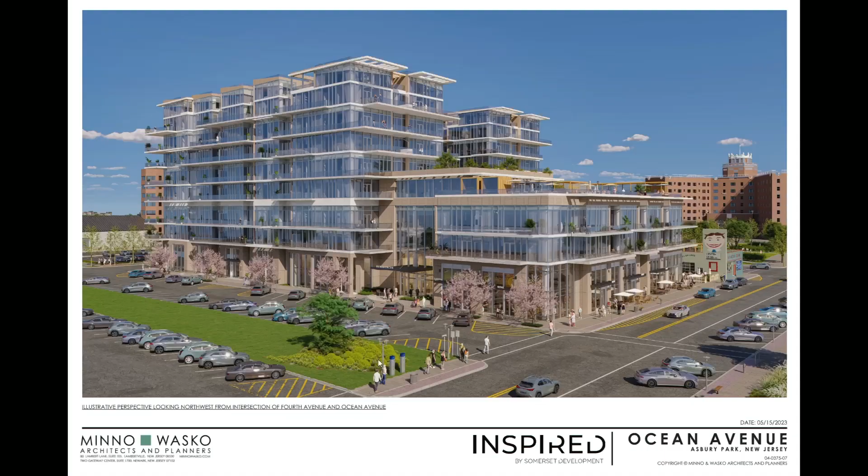You'll see all around the building, if you could show that, Michael, we have stoops on 3 of the 4 sides. The front, along Ocean Avenue, is retail, but on the residential side, rather than wall off the street and hide an interior building, we've actually engaged the street with residences, apartments that face the streets on 3 sides of the building. Very important.

So you'll walk by, and rather than seeing a blank wall, you will see people sitting. I mean, I can't promise the people, but I can promise the front porch. You'll see people sitting out there and being engaged.

As always, every good design, great design, requires some accommodations. We think what we're here tonight for is very minimal. We'll leave that up for you to judge. But great design doesn't always follow a pattern. There are things that evolve over years. Asbury Park has changed over years, and we've done our very best to bring you something that we feel you can embrace and will be a great boon to the community. So thank you very much for having us, and we're here to answer any questions.

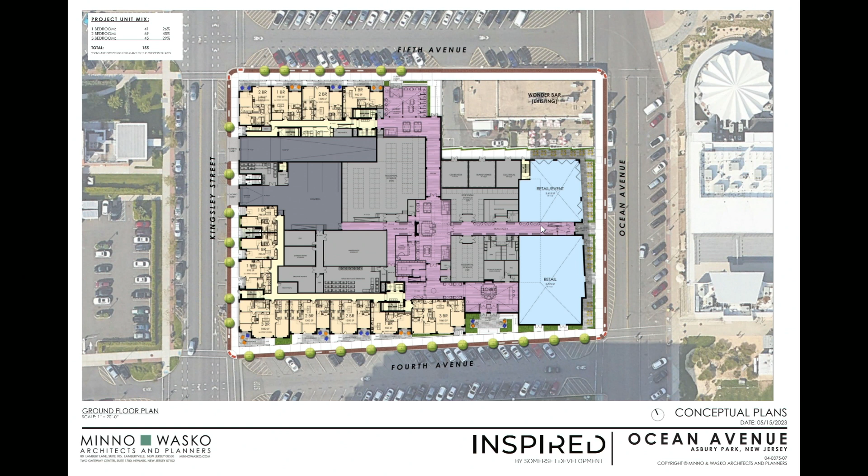At that center connection of the purple corridors is a lounge area, and there's also a bike storage area right behind the retail space. Your planner asked for the number of bikes we could store there—we can store 55 bikes in that location.

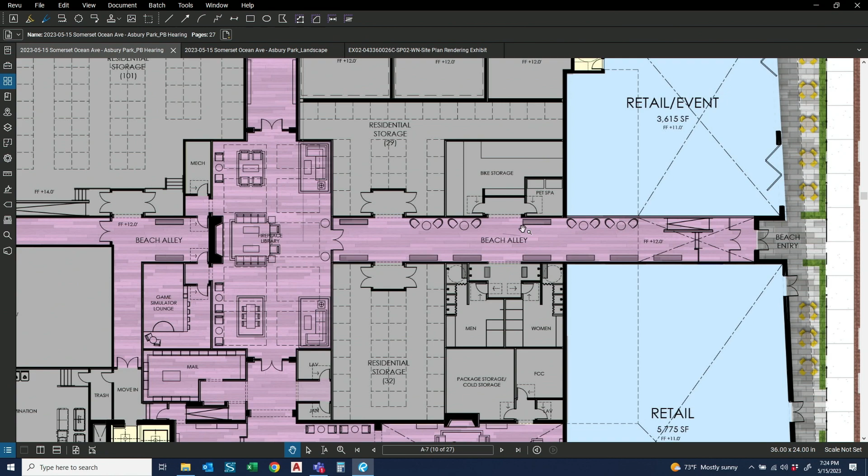We also have individual storage bins if people had a second bike or wanted to store one there. Behind that main lounge area, we have a gaming area, a sports game facility—it could be a golf simulator, we're not quite sure yet.

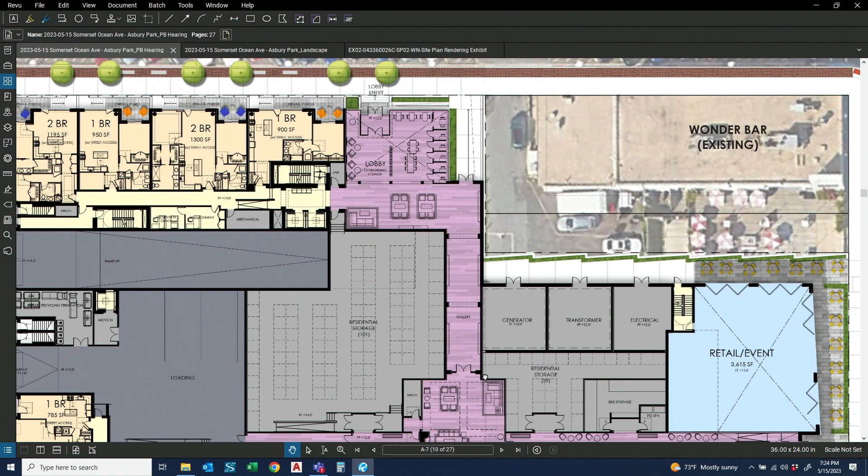I mentioned the mail area. As you proceed to the north corridor, we come to our 5th Avenue lobby. This is a secondary lobby to make it convenient for people who live in the north tower to enter the building as pedestrians from 5th Avenue. This also has an extensive lounge.

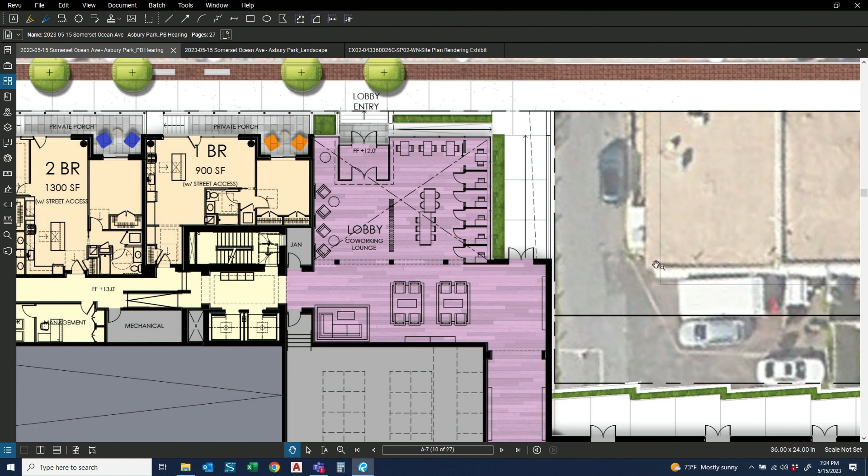We have some actual co-working areas in there for residents of the building. Sometimes we find people who are post-COVID working at home several days a week, like an area outside of their unit where they can do Zoom meetings and have private phone conversations and generally work out of the residential environment. This connects right up into our residential corridor and elevator bays leading to the north tower.

Moving to the Kingsley side of the building, you can see we have units fronting right on Kingsley. We have not only units on the ground floor, but entryways to stairways for some 2-story units that sit on the 2nd and 3rd levels. We'll show you that in cross-section so you can understand it better.

We have 2 vehicular entries. The one on the southern side of Kingsley is our main service entry, intended for move-ins. People can have their furniture delivered inside the building, and we have a service elevator that takes that directly up to the corridors. There's also room in that area to turn a small truck around.

We also have two main trash collection areas on the ground floor. On each floor, each tower has a trash chute which takes the trash down to a compactor located in these two trash rooms. That trash can be brought into the receiving area and picked up by our private trash hauler.

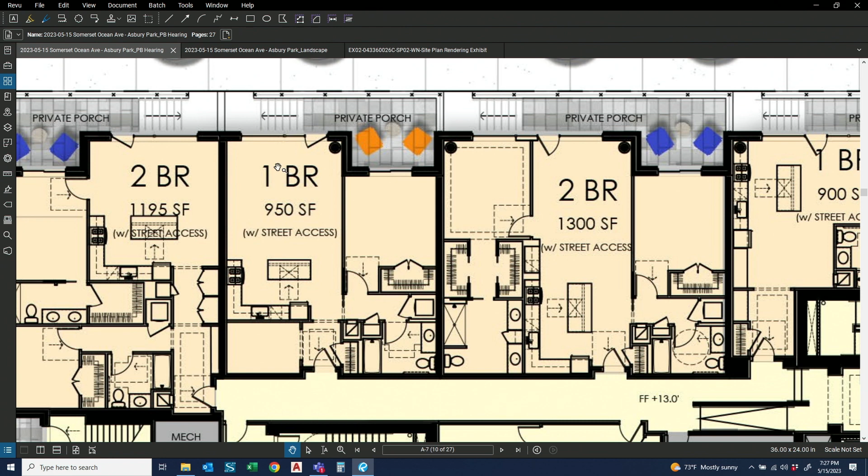They can also reach their unit from the internal corridor that gets them to their car, which is parked on one of the parking levels. So they have two means of access, either through the corridor or through their front door.

Okay, I think we can move on to the next one. First floor level. Yes, this is the A8.

So what we're showing here is the first level of the two-story units that I mentioned. If you look around the edges of the white units shown before, those are 2 stories in height because we have that high first floor. But on the second level, our first residential level here, that also is a 2-story level. I'll make that clearer when we get to the cross sections.

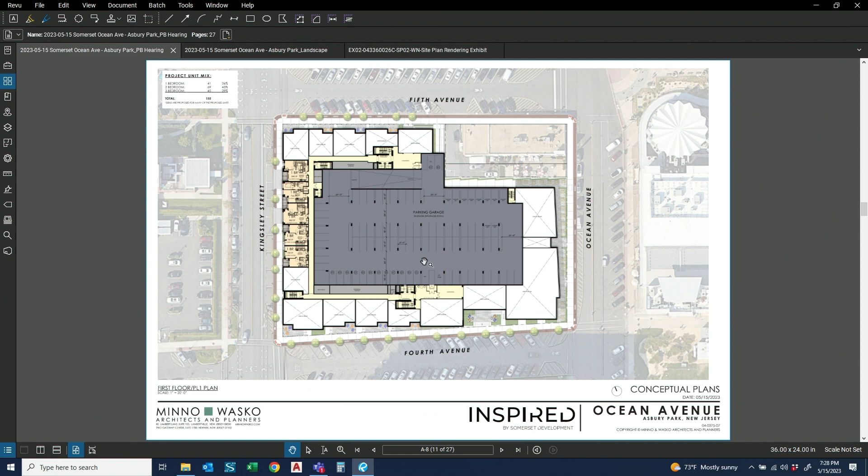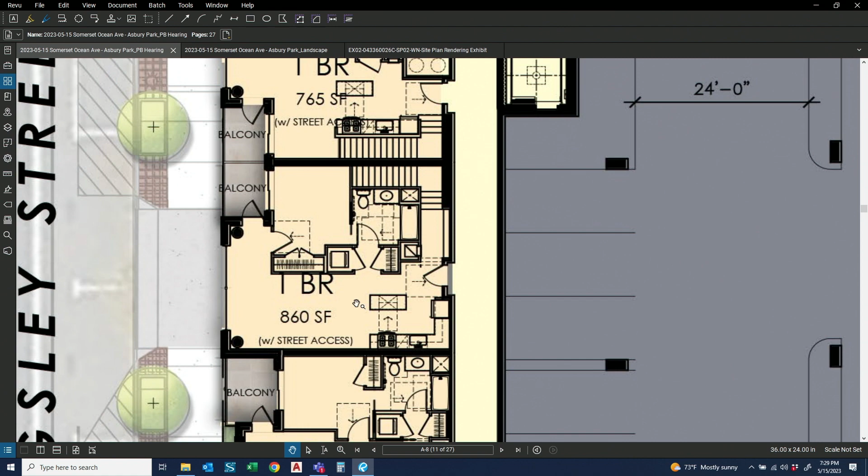Would you mind zooming in a little so we can see it better? So there is a stairway which comes up from a front door at the street level, bringing people up to enter their unit from the street. They also have corridor access to that. And the spaces you just looked at are 2 stories tall. So that's a unit with a double height ceiling, not a mezzanine. They too have balconies that face Kingsley Street.

What you see there is our first level of parking. We have 3 levels of parking, generally with 90 spaces per level. The ramp is located on the northern side, so people progressively ramp up to the upper levels.

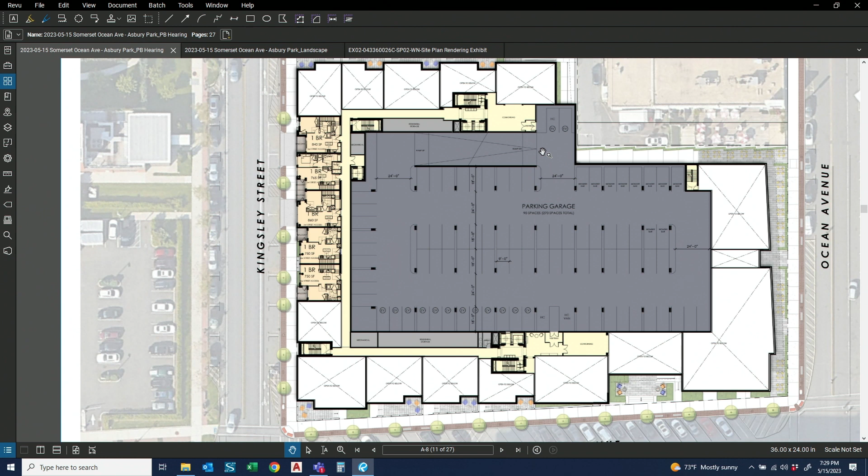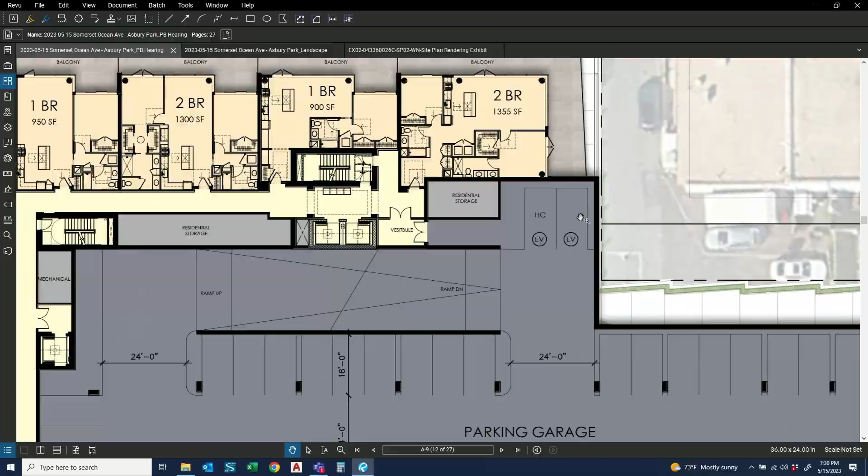While we're on the plans, maybe I'll address this. Your planner shared some concerns about 2 parking spaces on each level which back out onto the ramp area, and he had a safety concern there. We're actually over-parked, and we're going to agree to relook at that area and remove those spaces to eliminate any parking hazards. Originally I told you we had 270 spaces in the building. If we eliminate 2 per each of those 3 levels, we'll be down to 264 spaces, which is still conforming to our parking requirements.

So moving along, the next level, called the second level plan, you see the white areas along Kingsley - that's the 2-story height. This is A9. Those are the 2-story areas of the units located along Kingsley, and again you see regular units starting to wrap the plan. What you see here is units that are also along Ocean Avenue. They sit over the retail space and below our amenity deck.

This is the 3rd floor plan, A10, showing the third parking level. Now on the Kingsley side we continue with units that wrap continuously around. All the units on this floor are single level units.

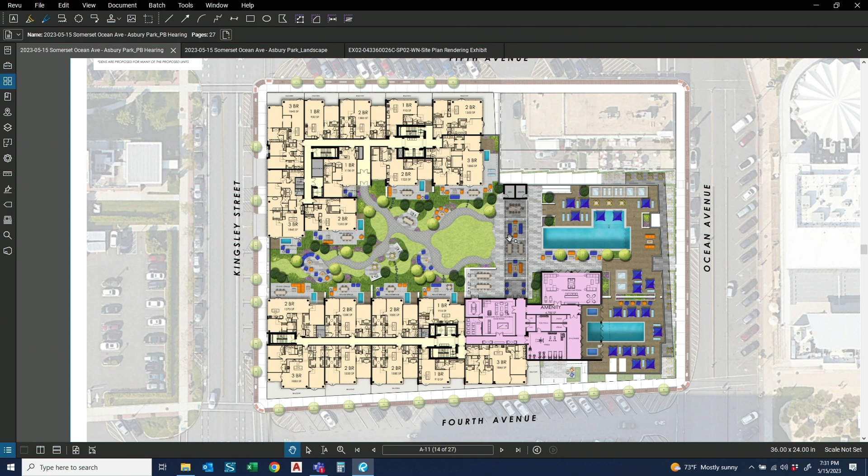So now we're at the fourth level plan - this is an exciting floor plan, right here. A11. What you start to see here is the definition of our two towers, one on the north and one on the south. So the building, where we have 8 stories and a mezzanine, now breaks into those 2 tower levels. And you start to begin to see the tremendous amenity package we have, both outdoor and indoors.

I'd like to take a little time here and talk about the indoor amenities. We have a common living room area - can you point to this? We have an area there that really becomes a space people can reserve for a party. If you want to have 15, 20 friends and your unit isn't large enough to accommodate that for a birthday party, you can reserve that. It's not rented out to the general public, it's for the units.

And that has beautiful doors that open onto our pool deck, so this could become an indoor-outdoor space. One of our charges here by our client was to make this a 4-season resort-type feel, and I'll show you some of the ways we've done that.

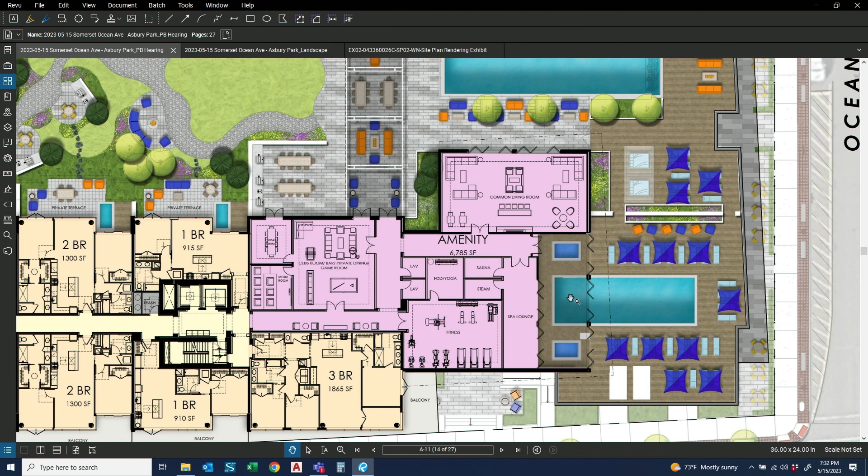We have a spa area in the front of our amenity package, which has not only a typical gym, stretching and yoga area, but we have sauna space and an indoor-outdoor pool. There are 2 sets of glass doors that open up and provide views toward the ocean. You can actually get in the pool in the off-season months, year-round - get in that pool and go outside and it'll be heated year-round. So you can utilize that spa pool throughout the year, and that we think is one of the great features about this project.

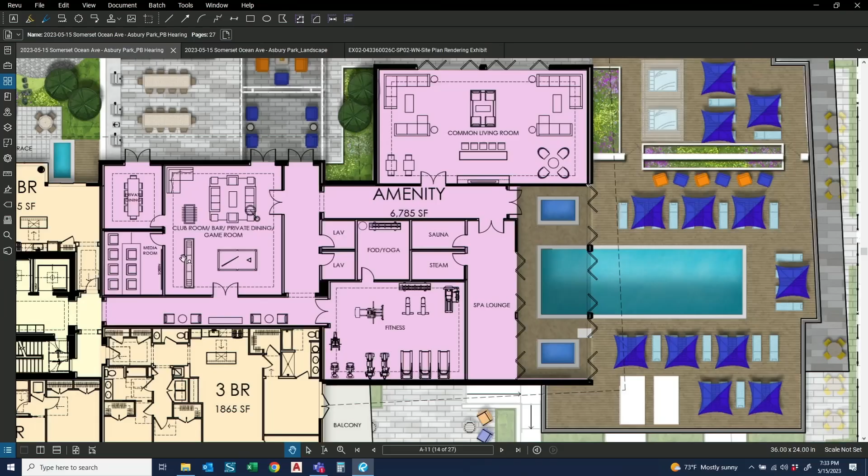Going a little further back, we have another club room and a private dining area, with views to the indoor and outdoor dining area, which has outdoor tables next to a common cooking area, a grill area.

People are not permitted to have gas grills on their balconies, so we've provided an area where people can reserve a grill and have a barbecue.

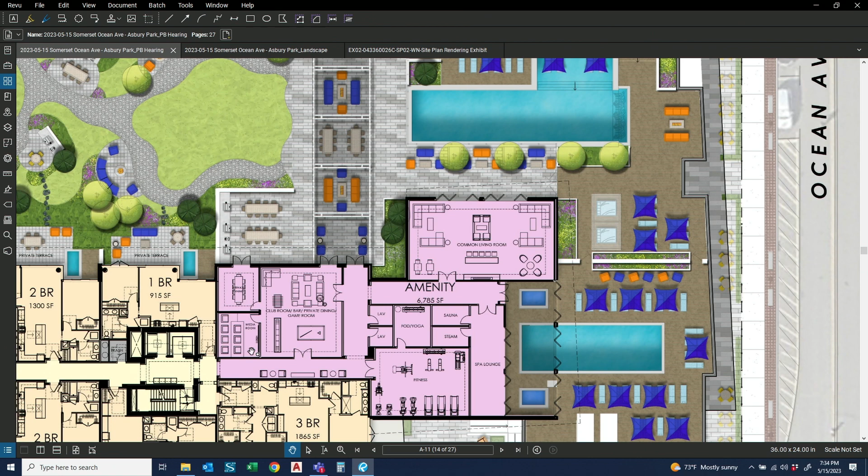We also have an indoor media room, an area where you can get a group of people together and watch the latest movie. We think that's going to be pretty popular too.

Our main elevator core on the south tower is located right in the center of the plan. Those 2 elevators give access all the way up to the 8th floor, and we have our 2 exit stairs required off of that floor area.

Moving to the north tower, we have our 2 elevators there with our 2 stair towers.

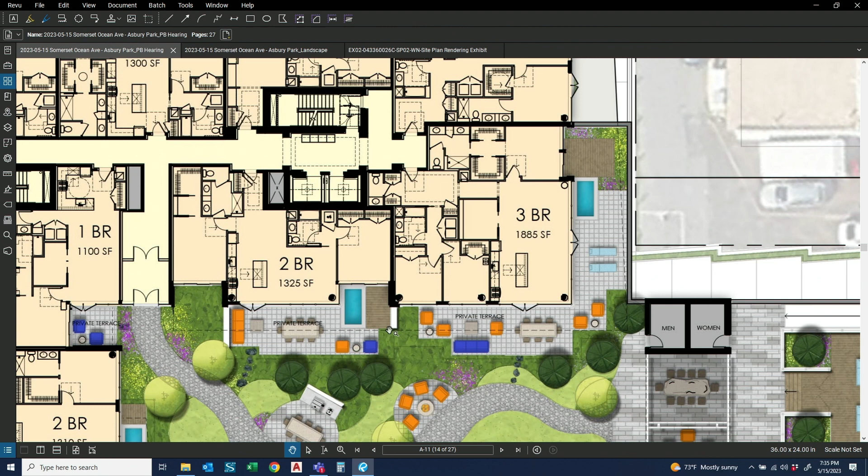One of the things about the units that face this tremendous grand terrace, the green area on the western side of our site, is that each one of those units has their own private terrace. On those terraces, which are on the roof of the garage, we've put little plunge pools - very shallow pools you can sit in, have a cocktail, and enjoy conversation. We think that's going to be a real popular item.

So those look out on this beautiful landscaped area. Our landscape architect's going to talk more about this, but we have a more informal pathway in that area with seating areas located there.

Same thing on the south tower for the units that face the internal courtyard - each of those 4 units has a private terrace facing that area. The outside units, on the street frontage, all have balconies along that edge. You'll see that in further perspective rendering and on the north side as well.

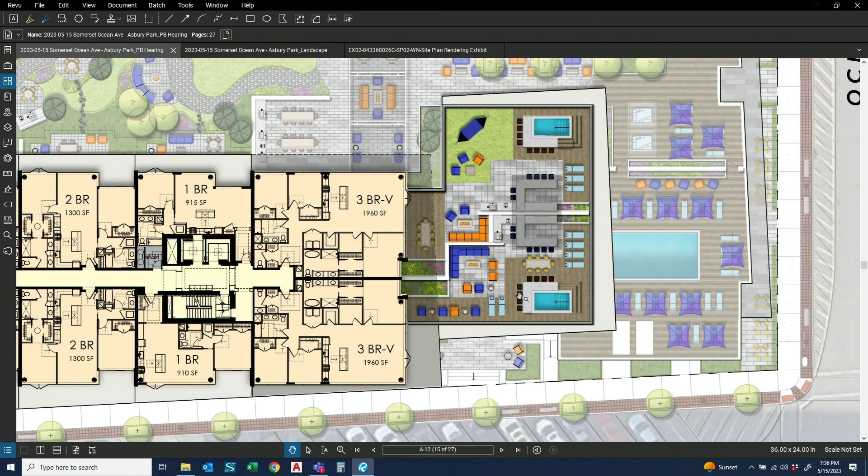Next slide - this is typical floors 6 and 7. This shows the 6th and 7th floor, which are exactly the same, with the towers coming up with 1-story units on each level. Let's move to the next one.

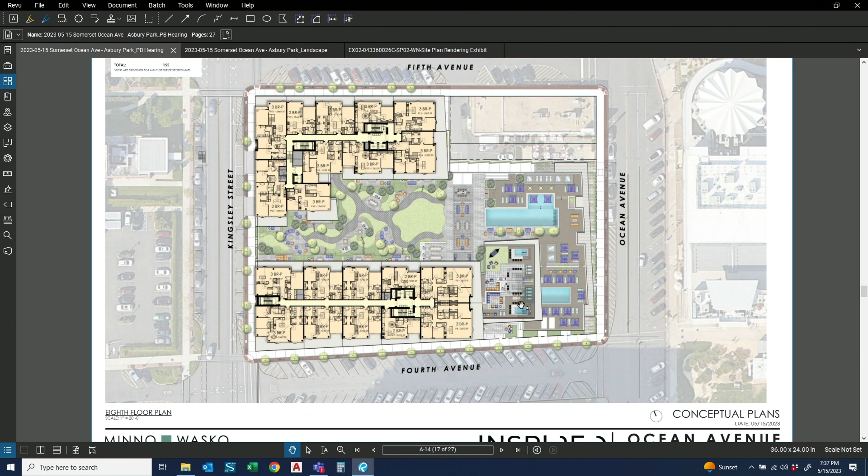The 8th floor plan is unique in that these are the units that have mezzanines in them, meaning they have a small floor area internal to that unit reached by an internal stairway. We vetted with your planner the allowable areas of those mezzanines.

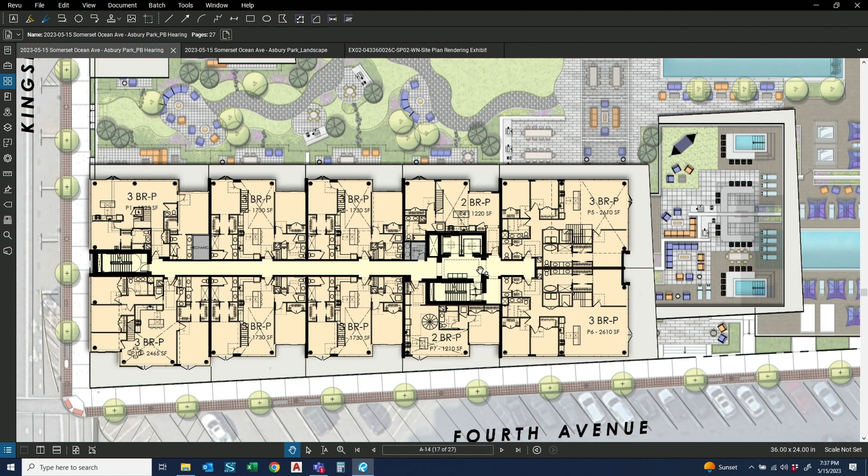We have a couple of different stairway configurations leading from the living space - a circular stair in some of the other units. Not only is there a mezzanine, but we have double height space in the living areas to give those an attractive pop. Dave, could you confirm the redevelopment plan allows the mezzanine on the 8th story, and that's where they're located? That's correct.

If you go to the next plan, A16, this is the mezzanine level. It's a little complicated to understand, but the lighter tan area labeled mezzanine is the actual floor area - a small den or overlook library that overlooks the living space below. The internal stairway comes up, and we generally have a powder room and a little mezzanine loft area.

From that area, you can come out to the roof that sits over that 8th level, and we have small patios located there. What these mezzanines also do is screen our rooftop mechanical equipment, which is on the 8th level roof - not on the roof of these mezzanines, but on this level in the center of the plan.

So we have our condensing units located in the center. The walls in those mezzanine spaces are generally blank to that center area, so you're not looking at a bunch of mechanical equipment. We feel like it's a rather good way to hide those. It's also in the center of the building, so none of it's visible from a pedestrian, a driver, or somebody on the beach. That mechanical equipment will all be screened in that location.

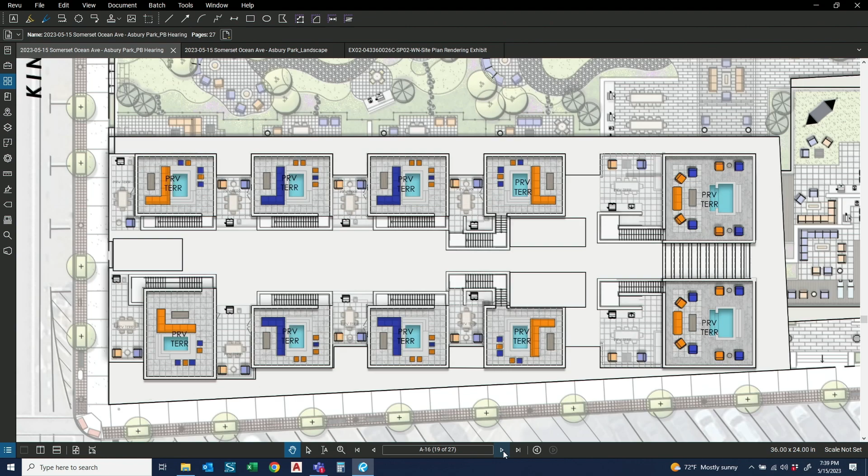Dave, can you confirm that it's compliant with the number of stories and the maximum height that was agreed to with the city at 130 feet? It is, yeah, and we can show that again in the cross-section of the building. But yes, our building is compliant.

We had a few TRC meetings with some of you present where we talked about the building height, and there was an agreement that we are an 8-story building with a mezzanine. I think there were subsequent agreements that our height would be capped at 130 feet from the average grade level to the rooftop surface. So we meet that requirement.

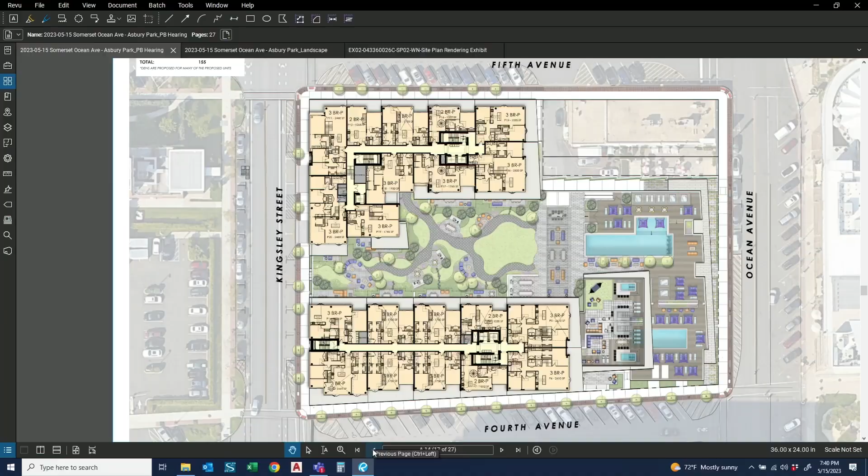Why don't you expand the plan a little bit on that 8th level to show the same thing occurs. Go back on the north, yeah, there. So we have those mezzanines on both sides of the building, both the north wing and the south wing. It also screens the mechanical equipment on the north side. Moving to the very top level, we have another rooftop deck just for those mezzanine units, with seating areas available up on those very, very top levels.

This is Exhibit 17, showing the top roof level of the building. You see that we have no mechanical equipment located there. The colored items on those roof decks are actual furniture that are located up there. We are showing the ability to have a plunge pool there, which is a very low embedded pool in that deck area.

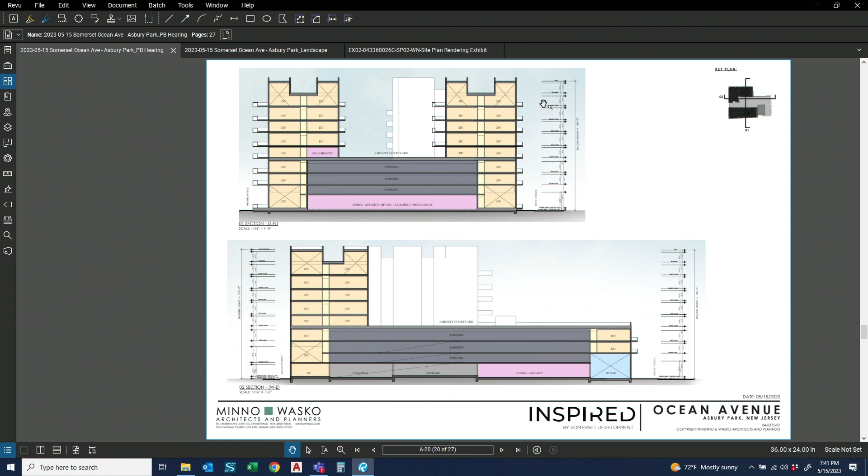Why don't we move on to the next slide? We can come back to any of these if you have questions. This is the slide which shows, if you look at the upper cross-section, this is Exhibit A-20, that we have 8 levels. If you look on the street sides of the building, either the right or the left, we have one double height level at base floor, then two levels up to the deck level, then five levels moving up, and the mezzanine is the very top. So we have 8 levels plus a mezzanine.

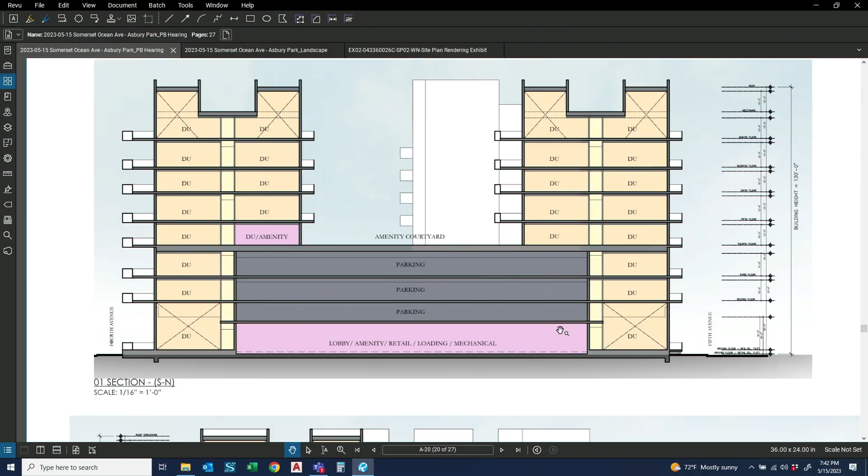The parking levels that you're seeing here are embedded in the building. Nobody sees those; they're surrounded entirely by architecture on the outside of the building. But because we're slicing through the building with a knife to create this view, you see the 3 levels of parking with our amenity courtyard on top, and the purple level on the bottom is our lobby area where the beach access is, where all those storage units are, where our mechanical space is, and then we have a bit of amenity space shown on the 4th level.

This is a cross-section cut the other direction. Kingsley Street would be on the left-hand side of this view, and Ocean Avenue on the right. On Ocean Avenue, we have our 2-story high retail with 2 levels of units before we get to the amenity deck. You see the embedded 3 levels of parking behind that, and below that our lobby area and mechanical space. It's totally surrounded.

On the Kingsley side, we're totally surrounded by architecture, so you can't see those parking levels. Here it's a little bit different configuration — I mentioned those two double height units on Kingsley. There's a single height unit on the ground floor, a double height unit in the middle, and at the 3rd level a single height unit. Then again we have 5 levels of residential with the mezzanine on top. So this too is 8 stories with the mezzanine from the Kingsley side, and you see that continues around the building.

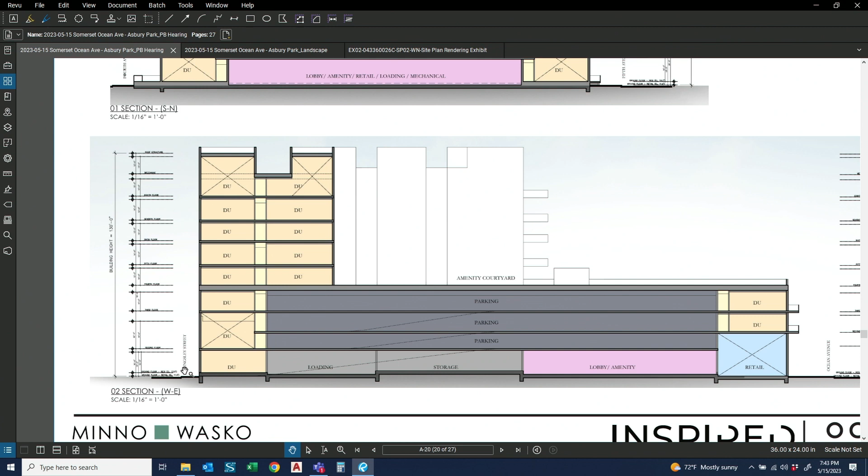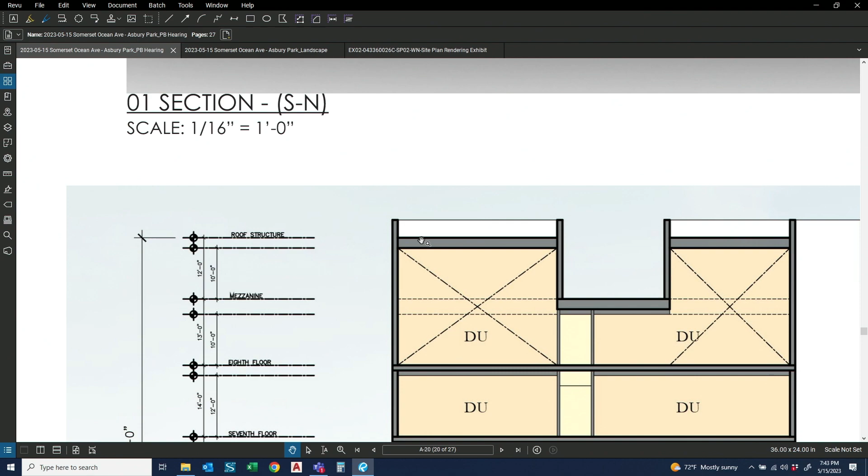All designed to comply with the 8-story limit and the 130-foot maximum height. The dimension is actually on there, hard to see, but we take it to the roof deck level. I think there was a question from your planner about the height of our parapet — typically we're about 42 inches for that. We're not totally designed in construction drawings yet, but that's excluded from the height requirement.

Next slide. So I want to talk a little bit about our building materials.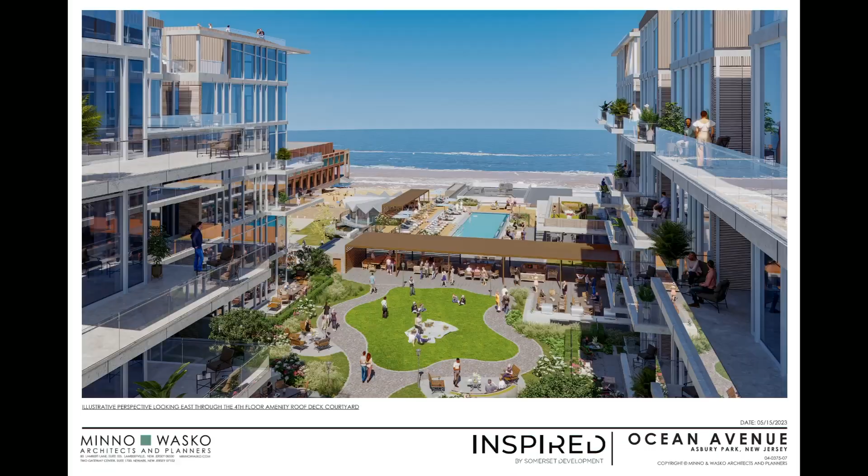Our next view is looking obviously east toward the ocean, between the 2 towers of the building. One of the things we want to show here, it's not an exact view of exactly what people to the west of us would see, but we've tried to preserve the view corridor from the Asbury Hotel directly through. Some of you might remember we showed a diagram at the TRC meeting where we showed the actual windows in the Asbury Hotel and how they focus through this view corridor to the ocean. This is Exhibit 822.

So in the foreground, you see our grand green terrace in the frontage, and then you see our main pool area in the back. The spa would be to the right of this picture over in that area. You see some of the shade structures, and I'm going to let our landscape architect talk a little bit about that. But what you see here is how the building opens up on the north side tower to make sure that this view is expansive through there. It's not all the way through a narrow view from Kingsley through—it opens toward the ocean side.

This is a view, what exhibit are we on? We're up to 823. 823 is a view looking from the northeast into our amenity deck.

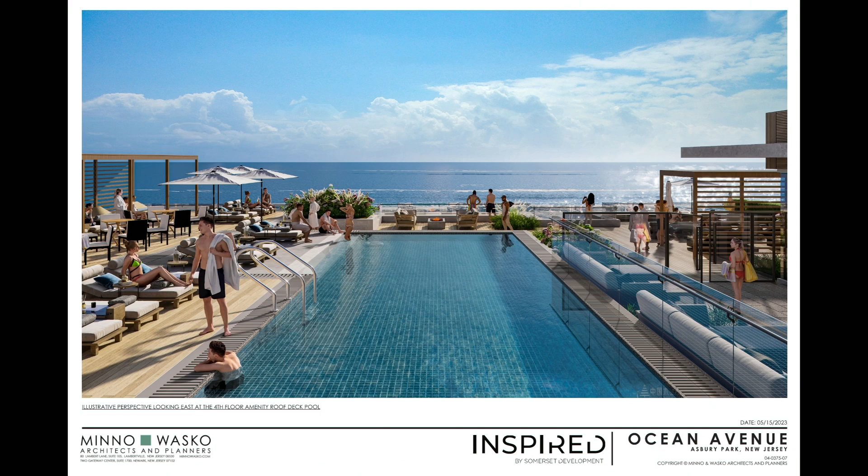This view is taken from the end of our main swimming pool looking out to the ocean. That's 824, and we're showing what a spectacular space this will be.

This last view, I think, captures a lot. It captures our place in Asbury Park. Our place has become a great place, and it's great because, as we mentioned before, the building is activated. It has a real great sense of street presence, and it recognizes, envelops, and loves that Wonder Bar as an icon to the city of Asbury Park. It opens right down to the area where you would go into the Paramount Theater, that plaza in front. You also have the potential event space in Bradley Park and the existing parking there along Fifth Avenue.

That's 825. I wanted to mention one thing architecturally here, because this rendering speaks to it. There's a requirement in the architectural guidelines for these buildings, which were generally conceived with a lot of historic precedent in the writing of the redevelopment plan. One of the things mentioned is buildings need to have a base, a middle, and a top.

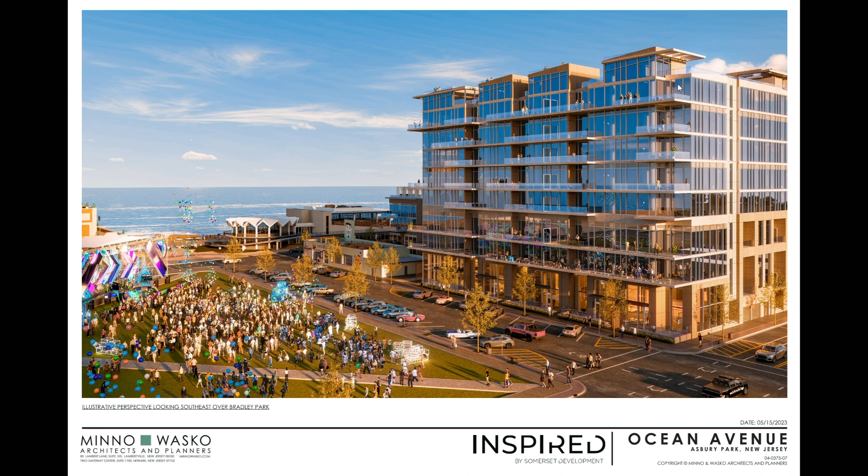As you can see here, we have a base, which is that first two-story component from the street, and a middle level. Then at the eighth floor line, we have a break because we no longer have balconies at the mezzanine level. So we remove those balconies, and that top level of pavilions becomes very specialized and different from the rest of the building. It's a bit of a stretch from a traditional view of architecture—base, middle, top—but I think, as an architect, it still works in this translated modern style.

So, I don't know where we'd like to go from here. Let me—obviously your testimony is that you designed the building to be in conformance with the redevelopment plan, yet we do have some design feature waivers that we are requesting. Could you take a moment and go through those and the rationale for those requests?

Those of you that have Mr. Sullivan's memo from May 12th—let's mark that as B1. I want to swear in my planner and my engineer, in case there's any discussion on that. Gentlemen, please raise your hand and solemnly swear the testimony you give this evening will be the truth, the whole truth, and nothing but the truth. I do. Please state your names for the record and your affiliation with the board. Michael Sullivan, Clarke Caton Hintz, Board Planner. Jason Fitchner, Board Engineer.

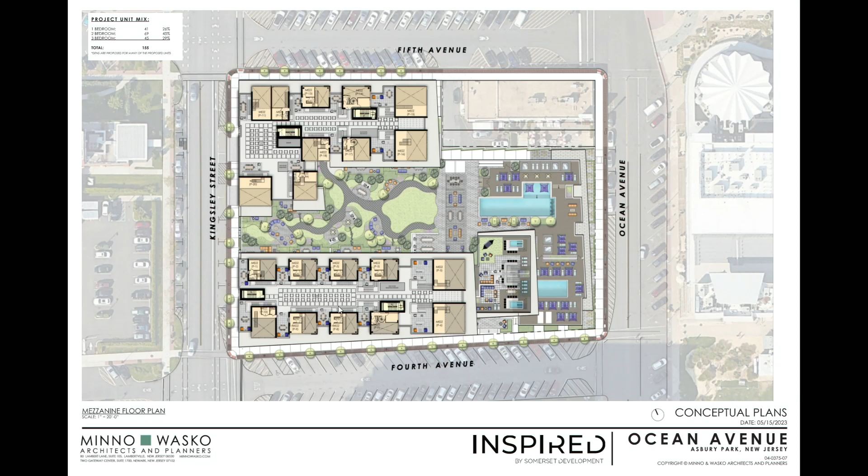So what's negative? The only thing I think could be construed as negative is the mechanical equipment, which we've left down on that 8th level, not up at the mezzanine level. We've screened that with the mezzanines themselves, the little boxes that are on the roof. That mechanical equipment, we've made every effort to screen from any kind of view. So it's not to say somebody on the 16th floor couldn't see it, but hopefully they're looking over that to the ocean.

The next item is J, building parts. The openings on a frontage must remain within a void to solid ratio of no more than 45%, with each facade measured independently. Mr. Sullivan points out that the plans include calculations verifying 64% voids on Ocean Avenue frontage, 63% on the Kingsley Street frontage, 72% on 4th Avenue, and 73% on 5th Avenue frontages. So we need relief from this, caused by the fact that we're creating this modern glass-centered building. I think this standard was written around a traditional building with punched openings in a wall surface. Here, our wall surface generally, not always, but generally is glass. So we've created a glass building, and we do need relief from that.

Building parts, K. Balconies are best used as a single continuous element at the location of the upper or lower expression lines. Multiple balconies, if required, shall be confined to the rear and side elevations. Michael's comment is that balconies have not been implemented along expression lines and are not continuous. There are multiple non-continuous balconies provided on the front facades of each building frontage. He's correct about that, we do need relief from this. The other point was that balconies shall be confined to rear and side elevations. I'm not sure we have any rear and side frontages, other than the interior courtyards. We're all front yards because we're street frontage all the way around. So we need relief from this.

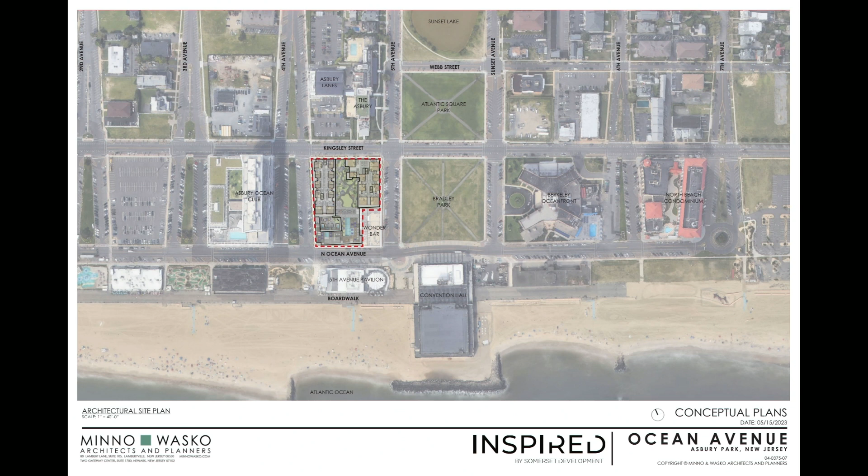Would you go back to your plans? If you look at the Fifth Avenue Pavilion directly across Ocean Avenue from us, there's an old portion which has been rehabbed recently. I think it used to be a Howard Johnson's, am I correct? Yes, and that's where that interesting roof form came from, with the cool ramp that wraps up around that building. Then there's a newer portion to the south, which has the Iron Whale restaurant on the ground floor and an upper level event space with sloping seating.

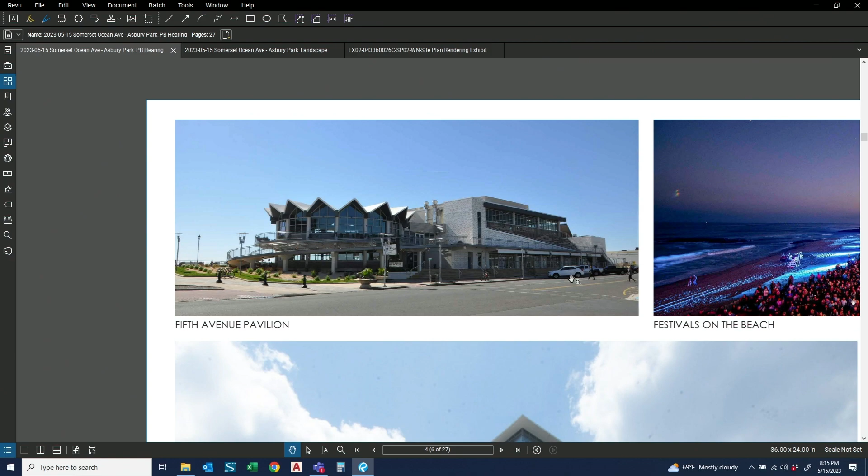Only part of that is new, just this piece is an addition. But I would put this building in all its pieces as a modern element, with some contemporary touches—the glass on the ground floor and the glass on the upper level is contemporary.

When you say modern, what does that generally define architecturally? It was a style that included the first modern buildings, sort of built from the 20s to the 40s, I would say. It included buildings that were Art Deco, but also some of the first glass buildings and glass skyscrapers built in New York. So it's a fairly broad style, but it's meant to capture that mid-century, 20s-to-40s modern style.

There are also a couple more buildings here. Yes, there's the Berkeley Carteret directly across Bradley Park from our building to the north—primarily a masonry building. And Convention Hall, okay, that's also a masonry building with lots of decorative trim.

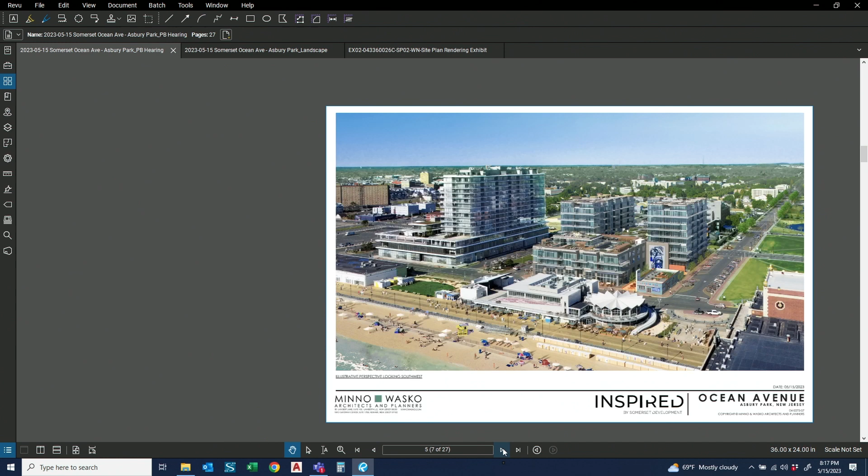Would you describe the Fifth Avenue Pavilion as primarily a masonry building? I would not. Even though some of it is glass or tile, I'd say it's primarily a glass building in the contemporary modern style, with some masonry elements—much like our building has some masonry look at the ground floor. And the Wonder Bar is primarily a masonry, stucco building.

So within the buildings you've described, we have the Asbury Hotel, the Berkeley Carteret, and Convention Hall, which are primarily masonry buildings. The Ocean Club is modern in its expression, a nice looking building—the lower floors have a heavier, denser, solid feeling, and the upper floors tend to be lighter. Okay, I just wanted to make sure we've clarified that. Yeah, thank you, that's helpful. Here in this photograph on the right side you can see the Berkeley Carteret.

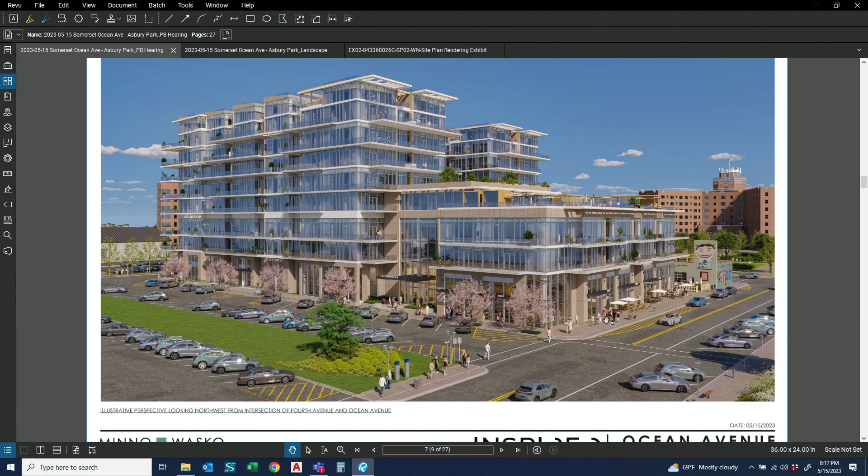Anything else I can clarify for anyone? Dave, does that conclude your direct testimony? It does. I'm available to answer any questions that the professionals might have, or the public.

I know you'd spoken about bike storage, but I'm assuming someone else will speak about it later. You'd mentioned there were 55 bikes that could be stored. You can store 55 in the bike storage room, but in addition, every resident in the building, all 155 units, has a separate storage cage on the ground level. So if there was a need for more bike storage, we could certainly accommodate it.

Is there anything the city requires as far as the amount of bike storage? Because 55 out of 155 units doesn't sound like a lot. I don't know if there's anything we require. I would agree 55 doesn't sound like a lot until you consider each unit has their own storage unit.

They do, but let's be frank about it. When you're coming in, would you just park your bike here, or now do you have to get your key to go to your storage unit? That storage unit generally has other things in it, like this could be their personal beach locker, their chairs, boxes. You're going to put a bike in there with all that? That's what I question, whether these storage areas are big enough to have a bicycle plus your beach things, a chair, a lamp, seasonal decorations, and other things.

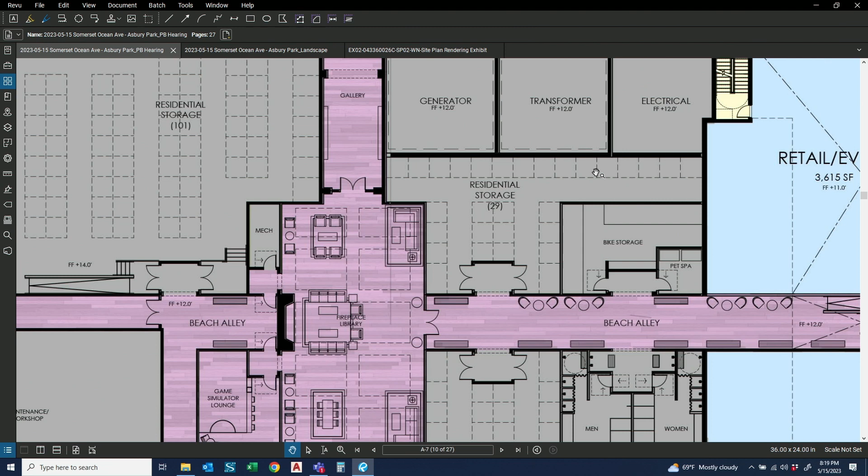These storage units, I think, are approximately 10 by 10. You can see them shown in the dotted lines in three different locations on the ground floor. But that's only some of them, the rest are down there. There are three locations, but they're all 10 by 10, as you point out. So every unit has a 10 by 10 storage space, which is a nice size storage unit.

Those are just cages, right? We haven't really designed them yet, whether they're going to be partitioned or caged, I'm not quite sure. We haven't done the construction drawings.

Does anybody on the planning board have any questions of this witness? I just wanted to get a good idea of what your units look like, your one bedroom, two bedroom, three bedroom units. We didn't really talk about that at all. Is there a typical one we could look at real quick, the unit plans, just the interior layout?

So if you look at the unit on the right up there, what sheet or exhibit is this, Michael, so I can be clear about the record? Once you get back to where you are, just identify the sheet. So this is Exhibit A-11.

If you look at the two-bedroom, 1,300 square foot unit, the way that unit works is there's a front door from the corridor, which looks directly out to the balcony through a glass wall, so the minute you walk in you see glass. We have an island kitchen toward the corridor, our dining area in the center, and our main living space out at the balcony wall. We split the two bedrooms for privacy from one another, and each bedroom has its own bathroom. The balcony space has a little outdoor room on the right-hand side for a larger sitting area or dining table. That's the two-bedroom, 1,300 square foot unit.

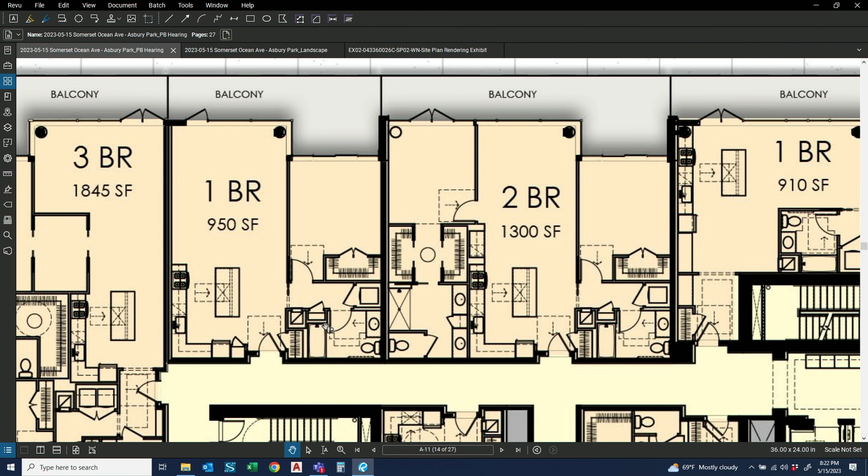If you look at the one bedroom to the left of that, that's 950 square feet. Again, a similar entry with kitchen, dining, living, and the single bedroom to the right, leading out onto a balcony with an outdoor room and balcony space.

The larger three-bedroom unit on the corner enters from the corridor into a vestibule. We have a powder room with coat closets to the left of the entry. Then as you come in, there's a large dining, living, kitchen area that faces the view and the private terrace. There's one bedroom above that with a private closet area and bath, and two bedrooms on the south side with a hall bath servicing that, and a washer dryer in the hallway. All units have their own washer dryer.

Those are some typical units. Is it fair to say that every bedroom has a window? Yes, thank goodness. We like that.

I have two questions, one around sustainability features. Looking at the notes, it mentions utilizing strategies and techniques sufficient to obtain LEED, not necessarily for certification, but that a scorecard will indicate which LEED requirements are met. So you're talking about the green issue? Sustainability, yes.

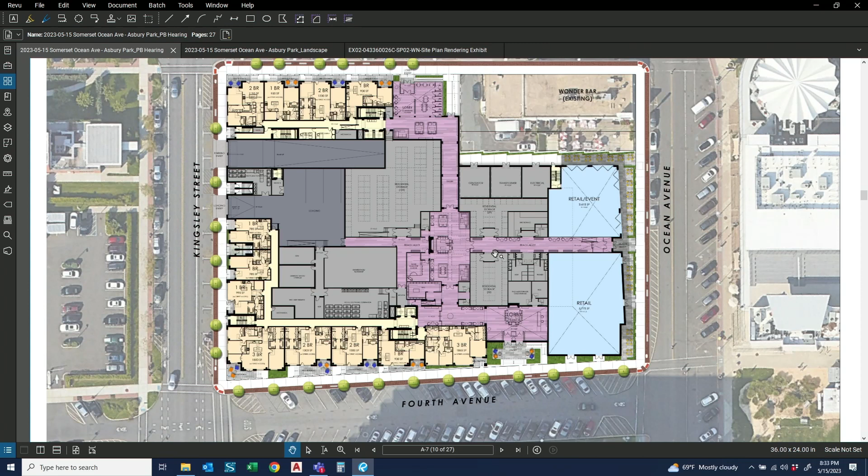Go ahead, do you mind going to your ground floor plan specifically? Oh, you're on your ground floor. Do you mind going to the rendering you showed of this corner?

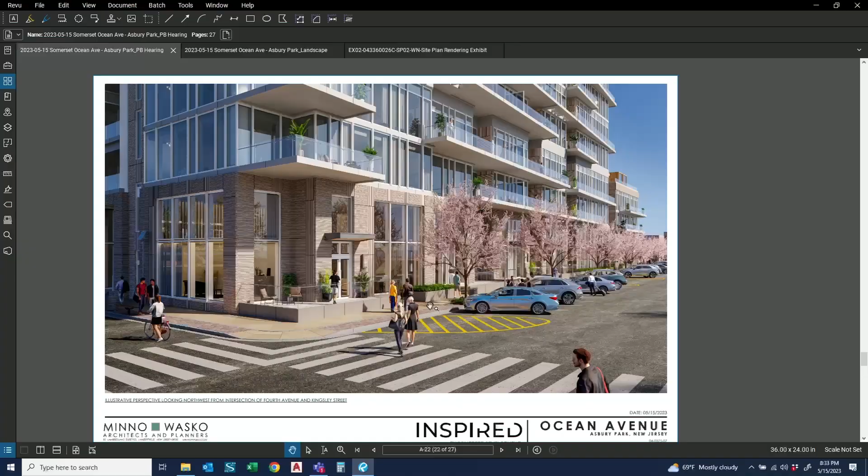I applaud your use of stoops along the faces. This corner one doesn't seem to work out as well as you might want. You don't typically see a porch like that right on the corner, especially on these very busy blocks, so you're going to have a lot of traffic. My suggestion might be that you rethink how this layout right at the corner works.

You might also think about this, maybe more for your engineer - what about the curb line? Creating enough space at the curb so that whatever space your tenant has isn't compromised. We don't typically have porches right at the building line, right at the property line, on a corner in a lot of cases. So I think the way the corner is working out feels a little off.

None of our porches or balconies project into the right of way. Agreed, understood, but even showing a lot of people here, I wonder about the quality of this space and the kind of public-y feeling. I would just look at that configuration.

Yeah, we could put a landscape feature there - you haven't seen any of that in Asbury Park, and I think you'll like it. But while I agree with what Eric is saying, if I own that unit, I may as well just invite everybody walking by into my unit, because there's nothing. You're in a fishbowl, a total fishbowl on your deck.

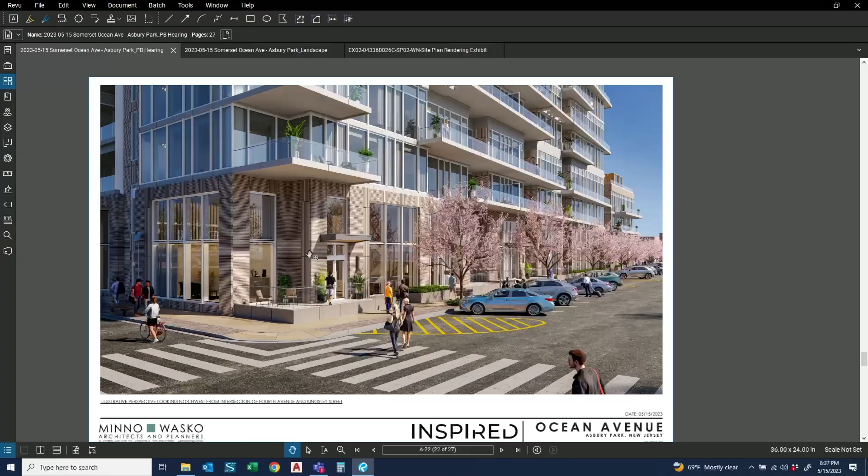I'm not even going to call it a color - I'll let you do that as it's in your expertise - but there's a kind of monochromatic nature to the whole building when you show your facades. Maybe calling out a little more attention to your Equitone with a little more density might help it look not quite so - it's hard to capture that in a rendering.

Yes, agreed. Because the Equitone has that striping and depth to it, it gives you a little bit darker feel in real life, because you see that shadow - there's almost as much shadow as there is material.

This won't be your last meeting here, so I think we should see a sample at some point - what you're thinking in terms of color and an example of the material. Yeah, we'd be happy to provide that.

Equitone comes in many colors, I assume? Yes, there are options. Isn't this something very similar that's on the Ocean Club, actually on the same side? I don't believe so. On theirs - they have metal panels.

I thought it was on the side where people that live there can come in. There's, maybe it's wooden, I'm not sure. It's something that just comes to mind. But that's okay. If bringing in a sample of what that looks like, what the options are, that would be good.

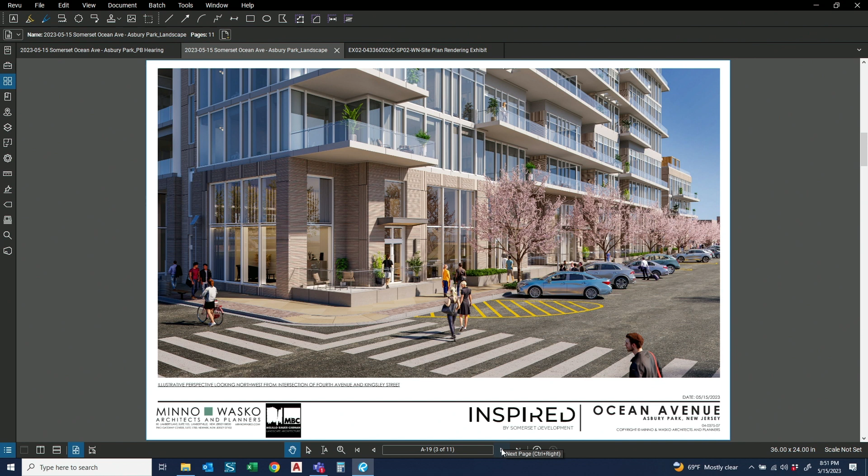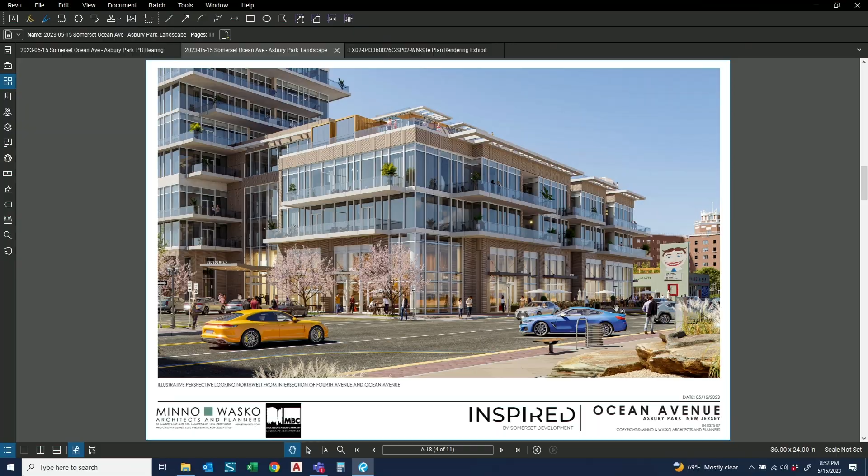Next slide. Again, this one you saw also, exhibit A19. This is the Ocean Avenue retail area. Again, the activation with the retail, perhaps restaurants, outdoor dining area. So again, we think this will be a terrific addition to Ocean Avenue with the activation of the restaurants and retail facing Ocean Avenue.

And this is really the gem of the project, I think - the rooftop of the 4th floor. This is the rooftop amenity plan, exhibit A17. Dave gave a very good explanation about the architecture, how it's framing this area. It's really doing several things here. Obviously this roof deck, first and foremost, is hiding our parking, just as it's hidden around the three sides of the building - it's also hidden from above because this rooftop is over top of our parking structure. So it provides a tremendous amenity, a great extension of the indoor amenity that Dave so nicely explained. It provides functional activities for the residents.

We've got two pools. Dave explained how one pool is a year-round pool, indoor-outdoor - that's the one to the south end. The larger pool to the north end is wrapped by a wood deck with chaise lounges and shade trellis and the like. It has a sun shelf for shallow water enjoyment of the residents. It's an infinity edge pool, with a waterfall on the right side. It's more of a seasonal, summer pool, meant to be opened from Memorial Day through Labor Day and likely closed and covered at that point. So that portion of the rooftop, the top right portion around that pool area, will be utilized for 3 months of the year, whereas the balance of the roof - the spa pool, the indoor-outdoor pool, as well as the entire green area between the two towers - will be utilized on a year-round basis.

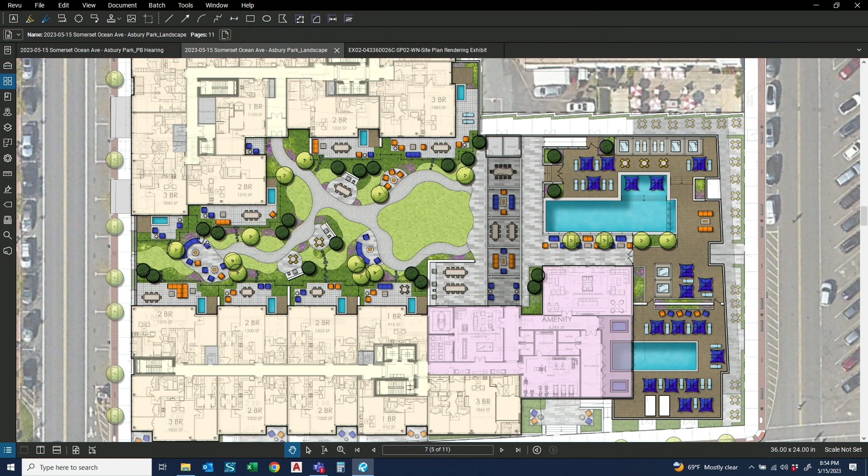The planting throughout it is coastal planting appropriate that will tolerate the conditions of the environment we talked about. Dave also mentioned the plunge pool as an option for the residents, should they enjoy the opportunity to add a plunge pool on their private patio. So it's a great area.

Not only is it functional, screening the parking below, but for all of those residents up above, the floors all the way up through 8, to look down upon this area from their balcony is a great amenity as well, a visual amenity.

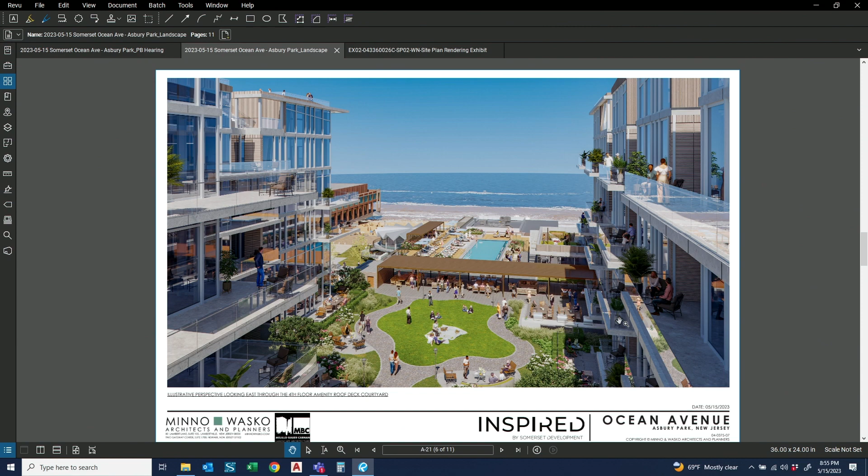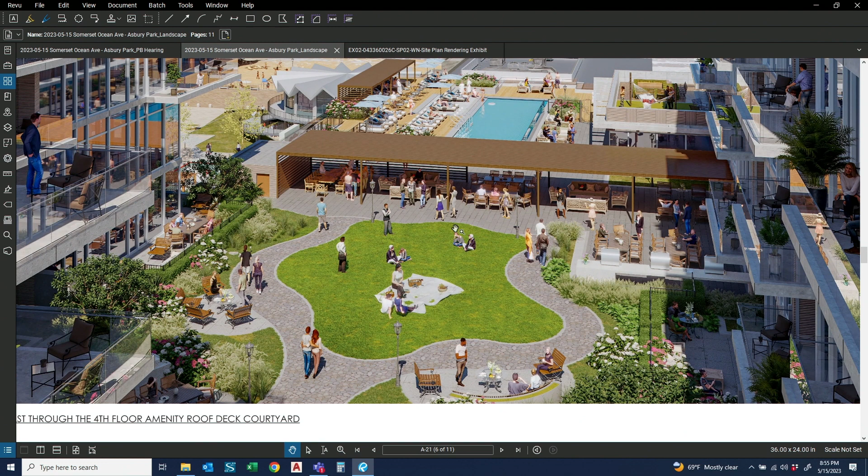Here's a view you saw earlier, looking back toward the ocean in an easterly direction. Terrific view, and you can see some of the amenities: the lawn, the informal passive pathway, the shade trellises, fire bowls, barbecue areas—just a great outdoor place for the residents to enjoy.

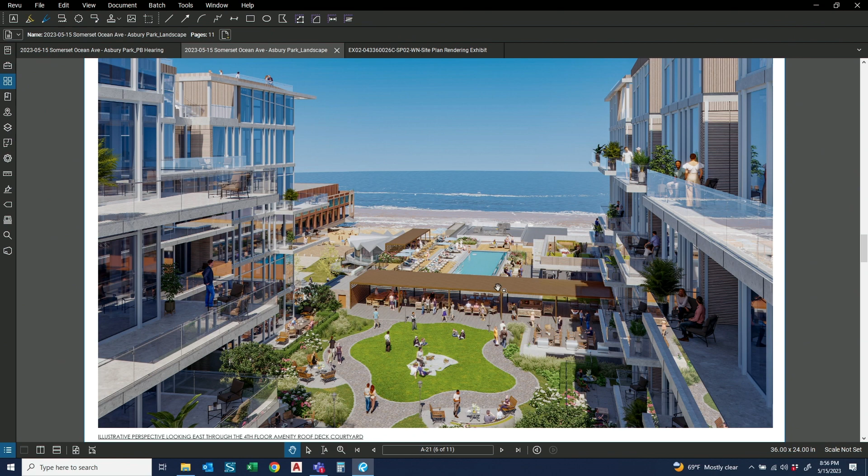We find out through our experience in North Jersey with a lot of the rooftops that these areas really expedite the purchase of units, make these much, much more desirable. The amenity spaces, both indoor and outdoor, are a huge advantage to the sellability of the residences. And they look great. Next slide, Mike.

Again, you saw this one as well from Dave. This is looking back—the ocean is behind us, we're looking back in toward the amenity area. The pool to the left is the indoor-outdoor pool, year-round usability. Shade trellises. We have 2 saunas off to the left side there for the use of the residents.

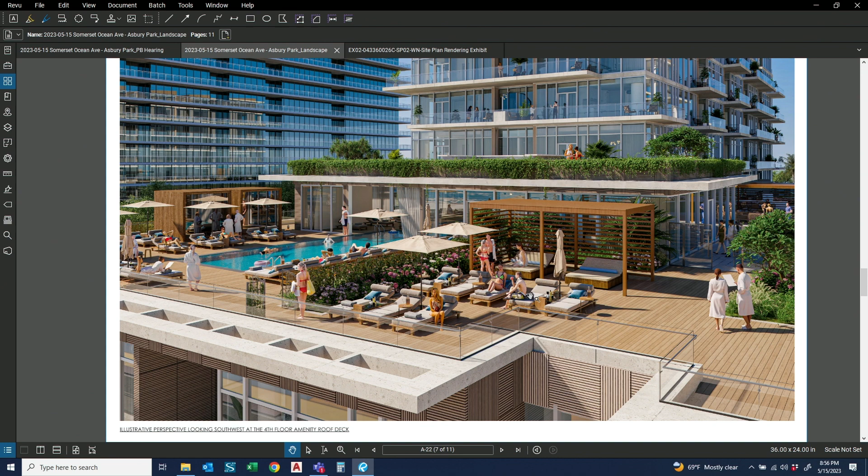Ample chaise lounges, wood deck for the most part. We do have a little bit of a grade change. What's not shown here is that the pool to the right, your summer pool, is actually elevated a bit, so there are steps and handicap ramps to access that area, in addition to the planting throughout the entire area.

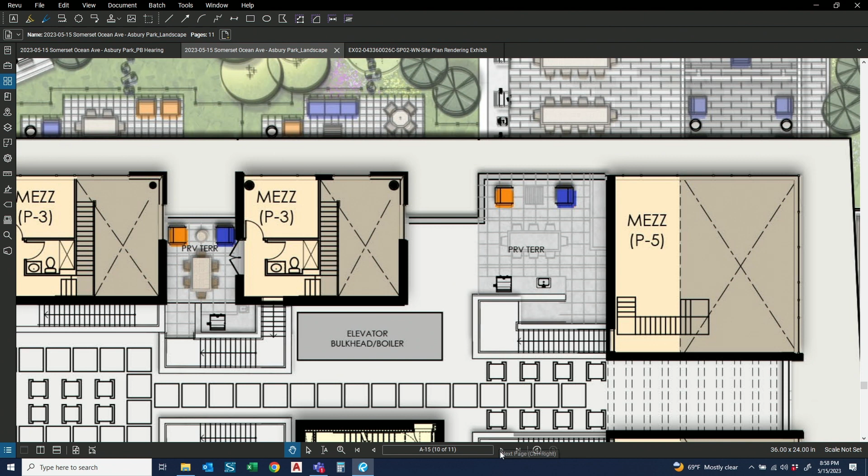There's a stairway that goes right up to the top, and this is like a primo view spot from here. Again, the opportunity for lounge furnishings, textured pavings, a plunge pool, and just great views of the entire surrounding area from up in this area.

So these are very special areas. Gas is coming up there, for the barbecues, on the lower of the two levels. The units could be electric or gas, that's still undecided, but they will be barbecues. You'll be able to have a hamburger and a hot dog up there.

If you're getting those put in afterwards, you're going to need the fire department to approve it, and you'll need permits all over the place. So if you're going to do them, do them up front, not afterwards, because it's ugly. Understood. I think that pretty much covers all the different levels, and in general we just have a gorgeous project, great architecture, and a great landscape to complement that architecture.

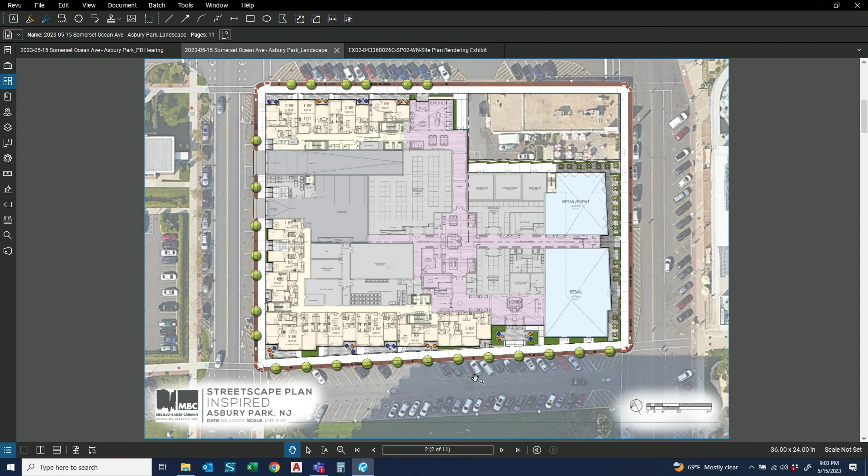Okay, let me finish on the lighting. We have lighting on all four sides of the building. On the Kingsley Street side is the Hadco light, the same light that's opposite - I'll use the Asbury Ocean Club as an example. The other three sides of the building all have the luminous fixture, which is again the same one that's at the Asbury Ocean Club, and it's consistent. They're basically 60 feet on center throughout, and they meet your guidelines.

So we have addressed proper lighting of the streetscape. In addition, there will be at some point building lighting, once the architects get to that level of detail. But even without that, we do show adequate foot candle coverage without the building lighting. But if there is building lighting, it has to comply.

What the board requests is downlighting - night sky compliant, dark sky compliant, yes. And the lighting on the rooftop as well, absolutely will be dark sky compliant. Everything downward facing - bollards, downlights, everything.

But as of now, just to be clear, the only lighting that's shown on the plan are the street lights. The rooftop lighting is not shown, the building lighting is not shown. Correct, so there's been no review of those. So that has to come back, because don't we need to know what the lighting's going to be?

We normally suggest that you do know what the lighting's gonna be. I'd like to know what the lighting's going to be for everything, so that everybody is happy around the building. In the past, sometimes we've done that at resolution compliance as well, with some of the light details, if you'd be open to that.

But it'll be very subtle - the rooftop lighting will be very subtle, understated bollard lighting. Just as a point, the streetlights that they're putting in are pursuant to the WRP standards. So if they're at the right spacing, the right wattage, and the right fixture, we're good. It's really the ones they have discretion over, which are the lights on the rooftops and the buildings. I'd like to see the samples of what they're gonna be, just like we have everybody else that comes here show us what they're going to put in.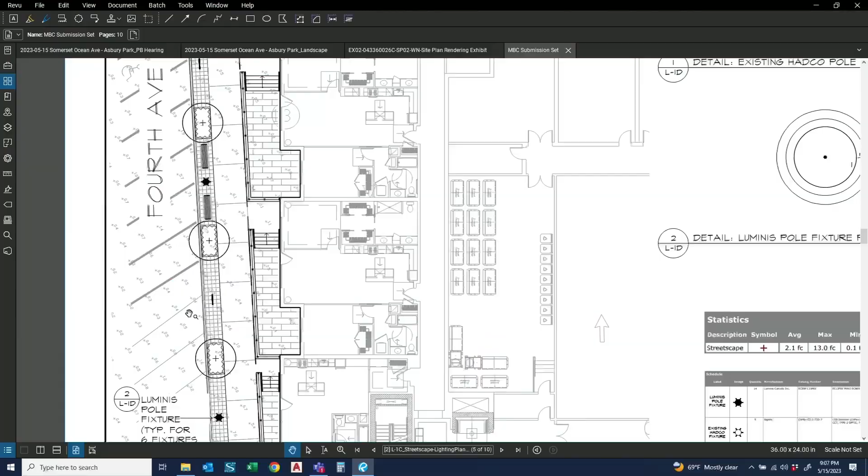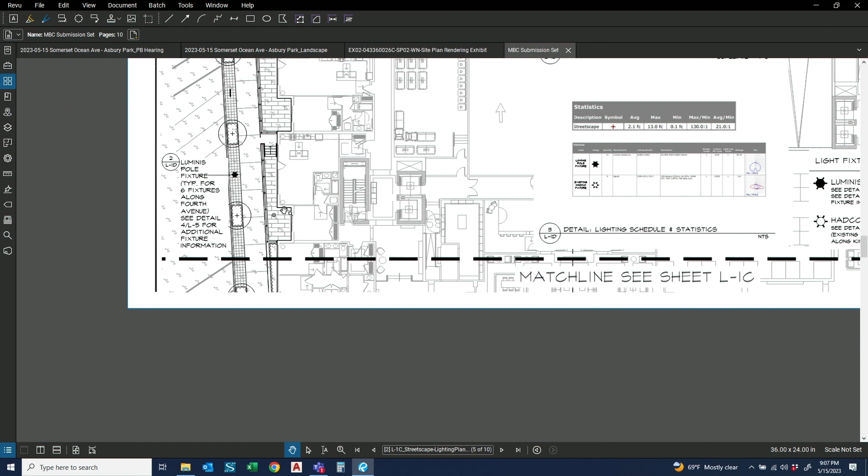Mike has just brought up the foot candle coverage. Luminis pole, so you can read them, all legible. And that's reflecting the streetlights. This is only streetlights, reflecting streetlights only. What's going to be on the building, so we can see what the spillage is, that just going to add to it, and we meet the requirement with just the streetlights.

So the board wants to see that item, exterior lighting and spillage coverage. Typically we would have that in time to review prior to a timeline. It's all about when we need to get our report back to the board.

So if you need the report a week in advance, that's fine, generally we have 1 to 2 weeks beforehand. It's fine, it's gonna be a little bit before we have another meeting, so I don't think that's going to be too much of an issue.

Okay, anything else? We're okay? All right, our professionals, any other questions? No? Okay, we have a public question. Go ahead. Hey, Michael Goonan, 1101 Ocean Avenue.

On the site plan, there is a fence, a partition screen along Ocean Avenue. Can you tell us more about that? The partition screen was a suggestion as a possibility of defining the dining area outside the retail on Ocean Avenue. It was either a partition screen or a planter to define that dining area from the public sidewalk.

So will that definitely be there, or is it optional? I think it's optional at this point, quite honestly. Again, it depends on what the use of the retail is, whether it's a restaurant or some other type of use, but it's a possibility. I think it's a good idea to have some definition at that point, but it's dependent upon what that final tenant is.

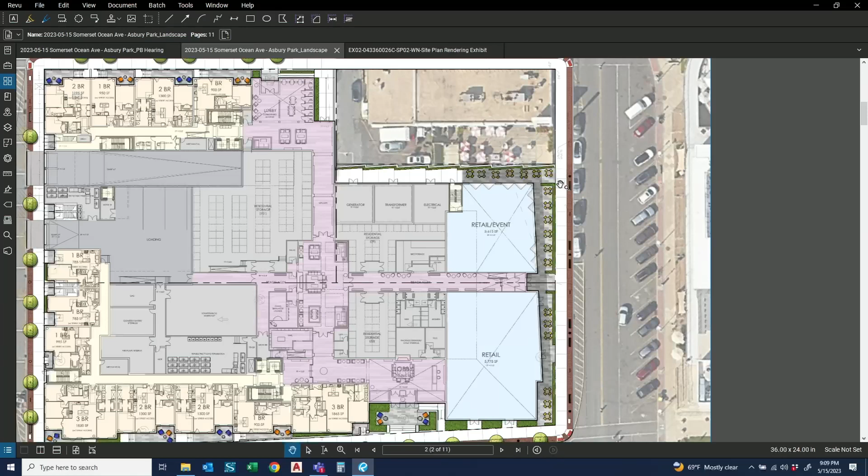And then I want to ask about the little courtyard between the building and Wonder Bar. There's something in there labeled as a garden wall. How high is that and what material is that? I think we had that about 8 feet high, and I'm not sure what that material was, to be quite honest with you. Mike, do you recall?

I don't know that we specified it, but the intention was to provide a buffer between the retail restaurant area and provide some privacy for the Wonder Bar outdoor area. It's poured in place on the plans. Does it say poured in place? It says poured in place, yep. That would infer that it's a concrete wall then, and it would be decorative, to be detailed, yeah.

And my last one is, I live in the Ocean Club. Trash on 4th Avenue is a huge problem in the summer because it just blows in. How many trash receptacles are there along 4th and 5th Avenues, and would you be amenable to maybe adding more? I think they're typically at the corners, at the street corners.

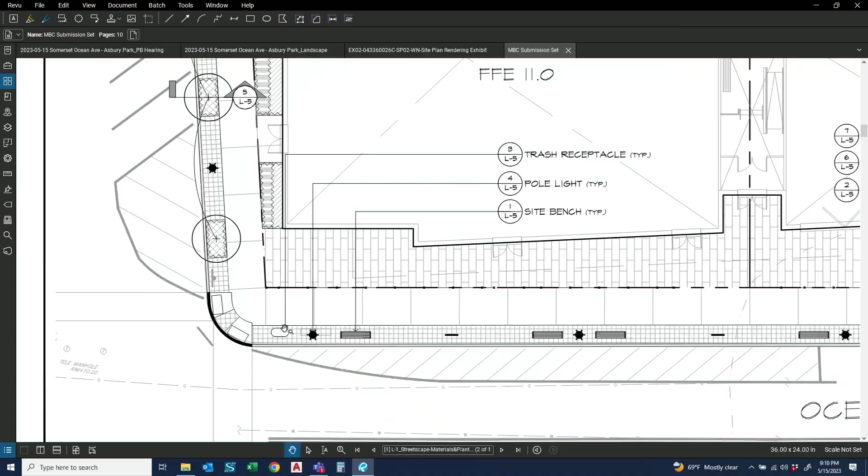So that would be one per each corner, a trash can and a recycling container, I believe. Yeah, there's one there, trash and recycling. Are you saying that's not enough? Well, yeah, in the summer, trash piles up at the receptacles that are on the island at the 2 corners on 4th Avenue, and then it just blows up 4th Avenue.

So I don't know if that's a site plan problem or a city problem, but we would be happy to add more if that's required. I think it's more a city problem, sounds like a maintenance issue. We've gotten complaints about the trash more on the islands, and that's when they were still using those ugly blue barrels. Now that we put in the blue and black ones that have a top, I think there's less spillage, but it's just a question of whether they're being emptied quick enough.

Okay, so this is probably not a site plan question, so thank you.

I may have misspoke. I don't think you have a detail for those walls. You have a detail for the porch wall, the stoop, yes, but you don't have one for the garden wall. I thought we did. That needs to be specified.

Just a question, it's probably not to you, and I'm just asking our attorney to let me know when we're going to discuss the whole separation of Wonder Bar, Yappy Hour, the driveway - who's going to have that, who are we going to talk to about that? So the landlord's attorney is here to speak on that issue. Okay, so somebody else will be representing that, all right.

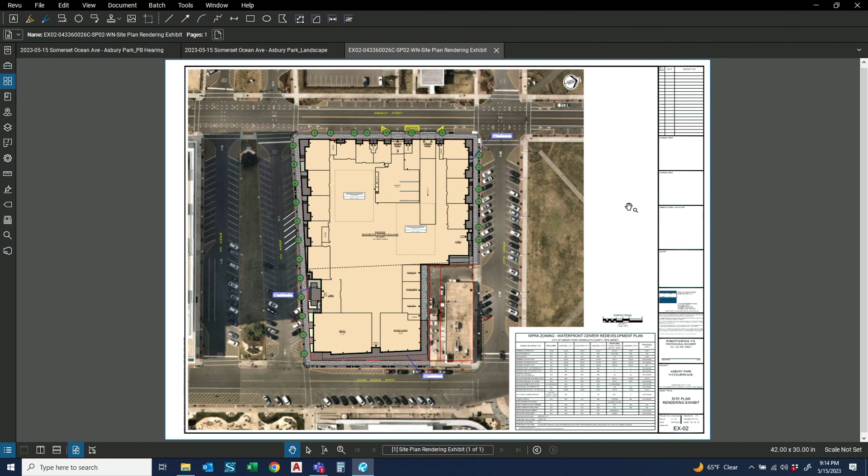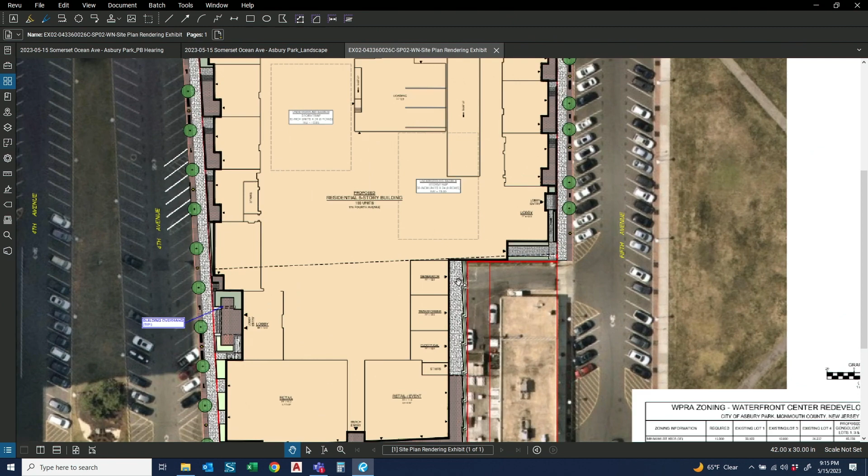All right, and what this exhibit displays is the site plan and also the subdivision that is before you. This application includes a minor subdivision with the Wonder Bar next to you to the north. There's a dedication of 16.7 feet wide by 150 feet deep, totaling 2,500 square feet in area. The existing Wonder Bar lot is 7,500 square feet, and with this subdivision, it'll go up to 10,000 square feet. Now the Wonder Bar lot is a non-conforming lot as it exists today. This will not make it conforming, but it will make the variance situation, if you will, improved.

There was a comment by your engineer about how we're going to perfect this subdivision, and we would like to perfect it by deed. It's typical of a minor subdivision.

And then with that, since Dave went first and then Tom went, there's not a ton to testify with regard to engineering, but I do want to talk a little bit about some important aspects of the property.

The property is relatively flat. It starts out at elevation 11, which is really important, and then it goes up to about 13. The reason elevation 11 is important is because the 100-year floodplain is at elevation 10. So our site is not within the 100-year floodplain when you plot it based upon elevation.

We have made application down to the state to CAFRA for compliance to the CAFRA permit that the city has, and in that application is a request for compliance to the floodplain management rules under NJAC 7:13.

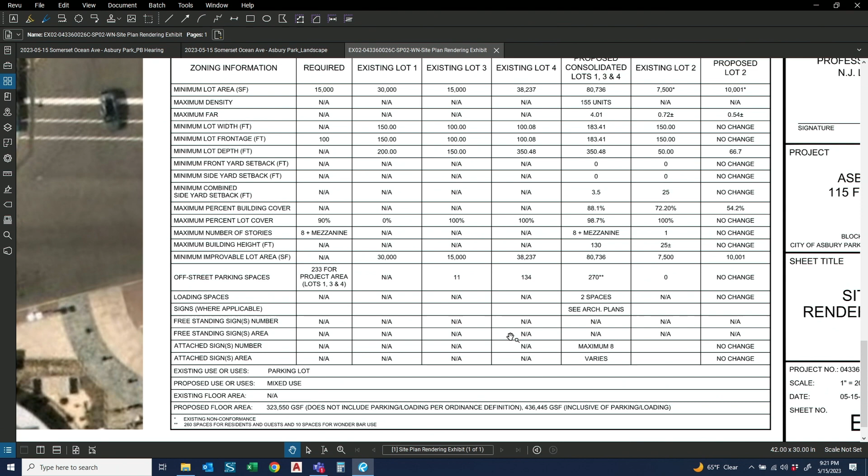So you're saying that you have 270 spaces, and only 233 are required? So 270 after you take away whatever it's going to be? It's 264 once the adjustment for the 6 is made. So you have 264 actual spaces, correct, and 233 are required. How many are EV? 42, and we're committing 10 spaces to Wonder Bar. Does that leave anything for the public coming into this, or is this all spaces only for residents? All for residents, only residents. What's the RSIS requirement?

I always average it in my head, but about 306. You've got 264 and you've got 42, or are you actually going to have fewer now? You're going to have fewer EV spaces? We would reduce probably by like 1 EV space or so. So you have 42 EV spaces right now? So you probably have 40 of those, and you get a bonus of 40 towards your RSIS and your local requirements, right? Yeah.

It's 10% max, so whatever the requirement is. 276 required, okay-ish. If you take away the 30 for the EV, so you're 6 short. Rough math, to RSIS, yeah. So we'll see the minimums, exactly.

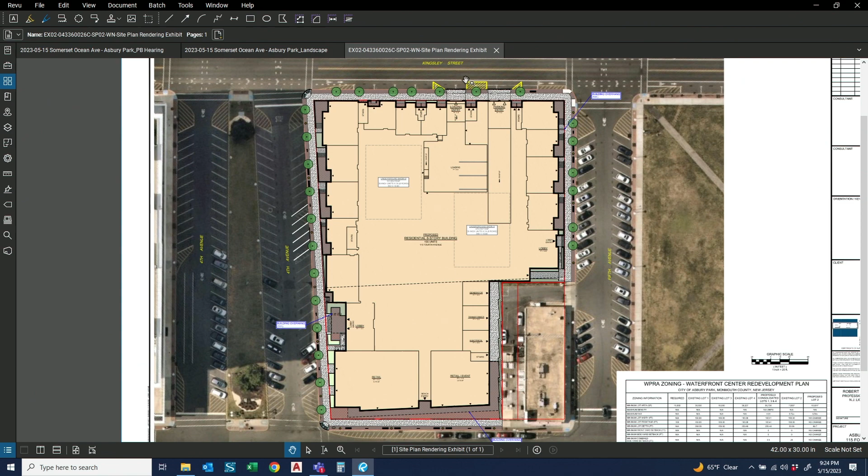And can you please go over once again around the building, we said you were adding a few spaces, removing some spaces. Yes, so you're adding 5 there, 5 in the right-of-way on 4th. And then on Kingsley, we're going to be -1 for our garage entrances. Is it 1 or 2? 2. It looks like more than 2, it looks like at least 3. It's 2 driveways, plus we're something -4, we're a net +1.

Okay, so can we talk about what's going on Ocean? There's quite a large space there, what's that about? That's already existing. Do we need to keep that? It's narrow there, it's a width thing. We would like to keep that striping. Well, okay, but do we have to? Depends, it depends on the width, if we can fit a parking lane there we can add one. I don't know what the width of that roadway is, I think it was done that way for the width, but we have to double check.

Well, it's just an opportunity for us to get more spaces if we can. 100%. Okay, all right, so who would do that? Is that us, or would the city do that? Yeah. Okay, I'd like to propose that the city take a look. If I could, there's no objection to looking at that area for more parking, but we would like an area for delivery of packages.

Your typical UPS, FedEx, and Amazon type deliveries, there'll be a front door delivery, so we would like that area for drop off. Why can't you use your loading area? I just assumed you'd use the loading area for all of that. That type of vehicle typically doesn't go into the loading area and into the building. We prefer to go in loading area.

Yeah, I don't want, this is our beachfront. This is where we have the highest parking demand in the entire city. It's a pain to manage, and we try to squeeze out every space we can possibly get. I would very much like it for you to be doing all that in your loading zone. You have an area dedicated to it, you're putting moving trucks in there, you basically have the space for it. I don't see why you couldn't do package delivery in that road.

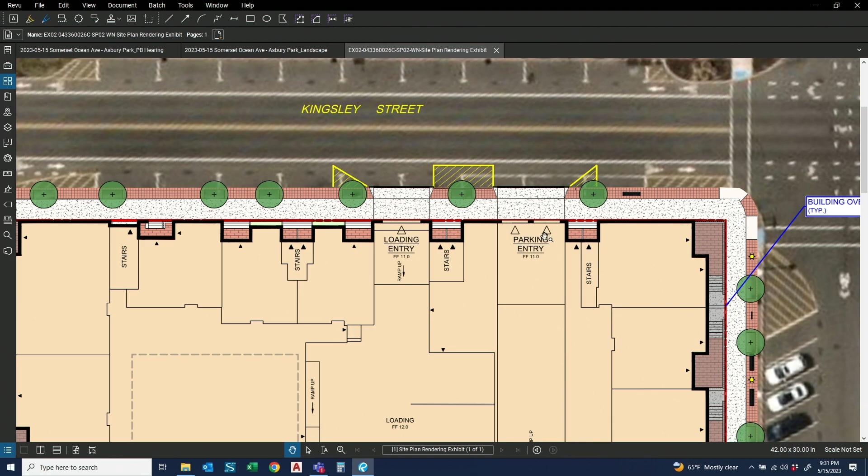So what we're asking for is to modify that sight triangle area so you can keep the parking—keep it safe, but not to the standard that is typically requested. Correct. Well, that would have to be worked out with your engineer and our director of transportation.

Number 37 on page 7, with regard to CAFRA, indicated we did make a submission to CAFRA back last summer, and we are rumored to be number 2 on their list for review and approval. So hopefully we'll get that soon.

Number 38 is with regard to timing of public infrastructure. Typically, public infrastructure on a project such as this would be installed at the end, because if you put it in early, all the construction activity for the building would damage the public infrastructure—your light posts, your benches, and things of that nature. So we would hold that off to the end, prior to COOs.

Number 41 on page 7 is with regard to encroachments into the right-of-way. There are no proposed encroachments into the right-of-way. The balconies will be on the property line.

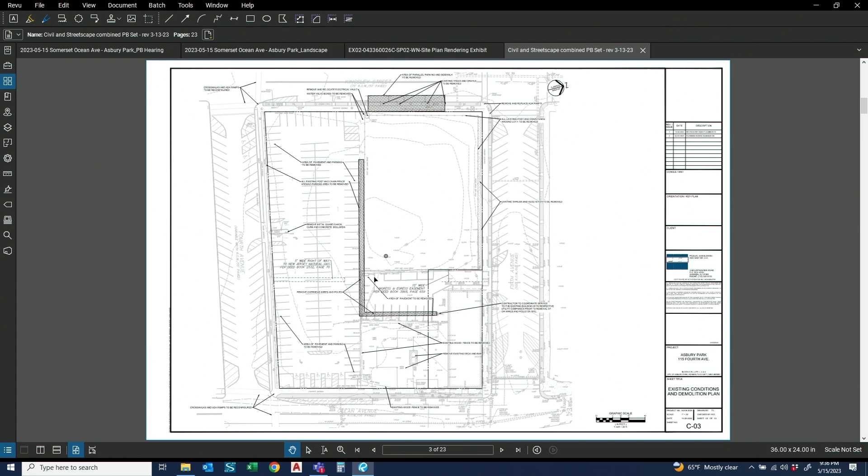So right now they are using more area than even the proposed lot shows. But we'll talk about how this space is going to be reconfigured so that they get the same functional result from the reduced lot size. We can do that with the next witness, the landlord's representative, because the applicant's not purchasing that lot - it's owned by the existing landlord. It just sounded like you'd said something and I didn't understand how that works, so that's fine, we'll go with someone else.

Are you finished with your testimony? Yes. Do any planning board members have any questions?

Our professionals, any questions of this witness? I just have one question, noted in our report, I don't know whether it's an architectural or engineering item, but it relates to pedestrian warnings for the garages. The applicant will provide them. I think that was the only outstanding thing I had.

Site - okay, well I was going to bring that up, yeah. I do want to get a staging plan from them for their construction. They provided one to the city before, but I want to talk about it here so we can discuss, because they went through a few iterations, and I want to make sure we know exactly what you guys are going to do for staging.

We do have a staging plan that you submitted as part of this. I'd like us to discuss that here if possible, so if you come back with that document. Are you prepared to discuss the staging plan tonight? I'm not. Besides what our transportation director would like to know, we'd like to know what streets are going to get closed, how long they'll be closed, if they're going to be closed - it's a big concern to us. I can address that for you.

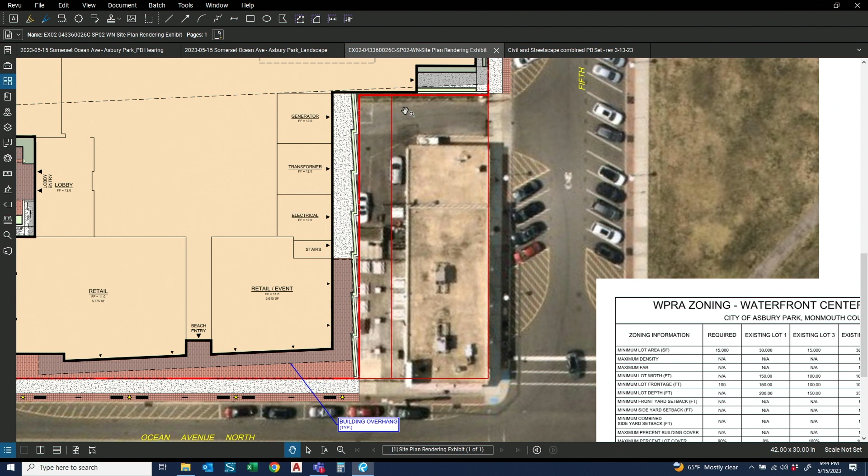Okay, so if they contact you, you're willing to work with them? Correct, as the landlord of the space, to reconfigure this. Because, as you know, how popular the Yappy Hour is, I just want to be sure we have adequate space for that. So now it's in Madison's hands. That's correct.

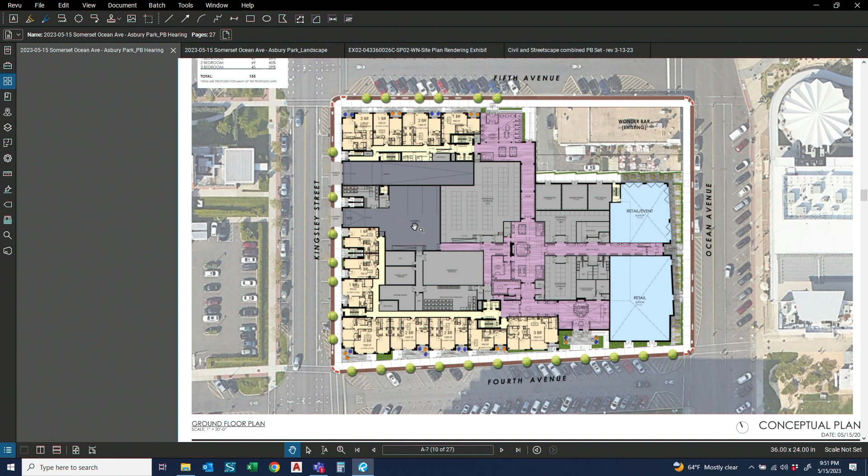Why don't you talk to your attorney quietly? Because you're not under oath, and the board can hear what you're saying. So if you're going to talk, you should talk to your attorney quietly, unless you're under oath. Right, please, that's all. So I'll just answer the question.

As far as what we don't want to have happen is for individual applications to be held up while we go back and look at the infrastructure component report. If it's a question that we need to work with the city on looking at the infrastructure component report, we'd like to just handle that separately.

Because at the end of the day, it's not the subsequent developers who are doing the streetscapes, it's the master developer who has to do it. So even everything you heard today about the curbings and sidewalks and everything, the master developer does that. And it's our responsibility on this block because more than 50% of the block is being done, so we have to coordinate the master developer doing the infrastructure requirements.

Do it separately. We're willing to have discussions on the infrastructure component report, just not as individual conditions of various planning board report resolutions.

I understand, I agree with them. I don't want to slow down this project either. That's fine with me. The worst thing we can do is slow down any project if it's something that's probably going to be worked out, but it's got to be worked out at a different venue. Correct, we shouldn't be slowing down this because of that. We're happy to work with the Mayor.

I also think it will be worked out well before they start construction. But they need approval to start construction and start pulling permits. So I think in between, the bump out problem has a good chance of being resolved. Fine with me, we're happy to work with the city.